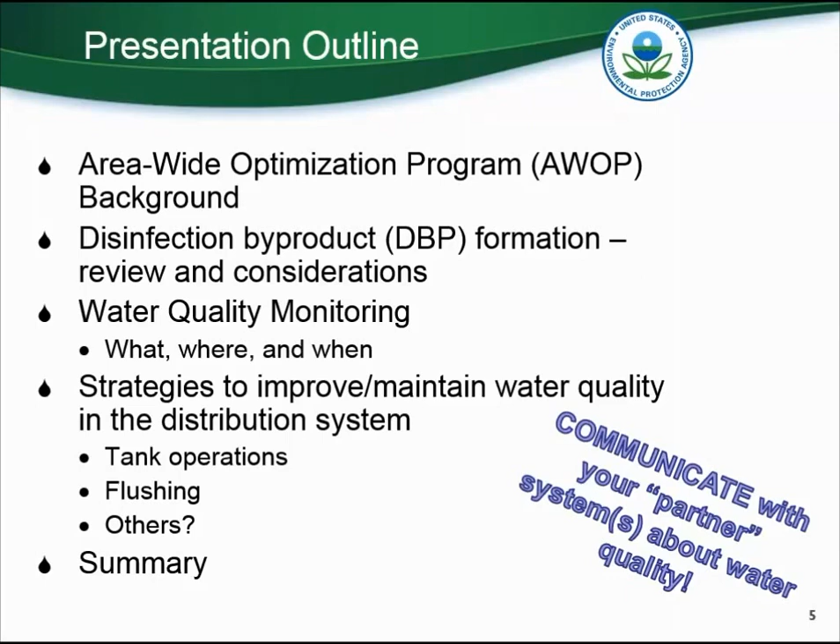The area-wide optimization program encourages drinking water quality beyond compliance levels, primarily through enhanced process monitoring and control using existing staff and facilities, so optimizing existing facilities. We also promote measuring performance relative to optimization goals, and we work hard to develop technical tools and implementation approaches which focus on improving or maintaining water quality, focusing on the multiple barrier approach.

In this case, we're really focused on the distribution system, keeping in mind that the residual in the distribution system is the last barrier to public health protection before consumers drink your water. The program began in 1989 with microbial or turbidity optimization at surface water treatment plants, and more recently has expanded to other areas, including control of disinfection byproducts through optimization of treatment and distribution system operations. That's what we're going to talk about primarily today.

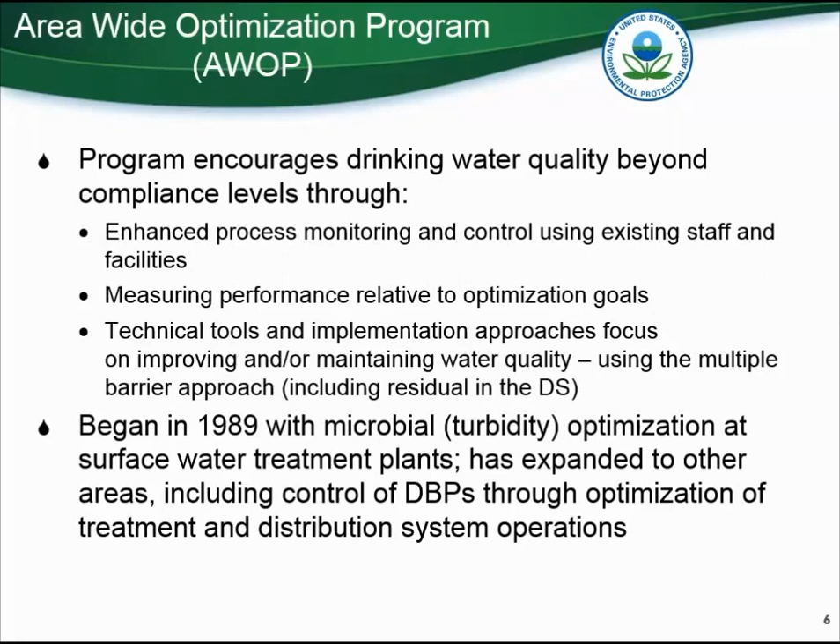AWOP establishes water quality and monitoring goals as well as operational guidelines that are generally more stringent than regulatory requirements. This is done to provide an increased level of public health protection to consumers, but also as a safety factor for compliance, for water system operators to keep in mind. We have established performance goals for disinfectant residuals and disinfection byproducts.

From the monitoring side, we also encourage paired residual monitoring, pH and temperature out in the system as well. We also have monitoring goals for frequency and locations throughout the system, which I'll talk about shortly, as well as operational guidelines for water storage tanks related to turnover time and mixing.

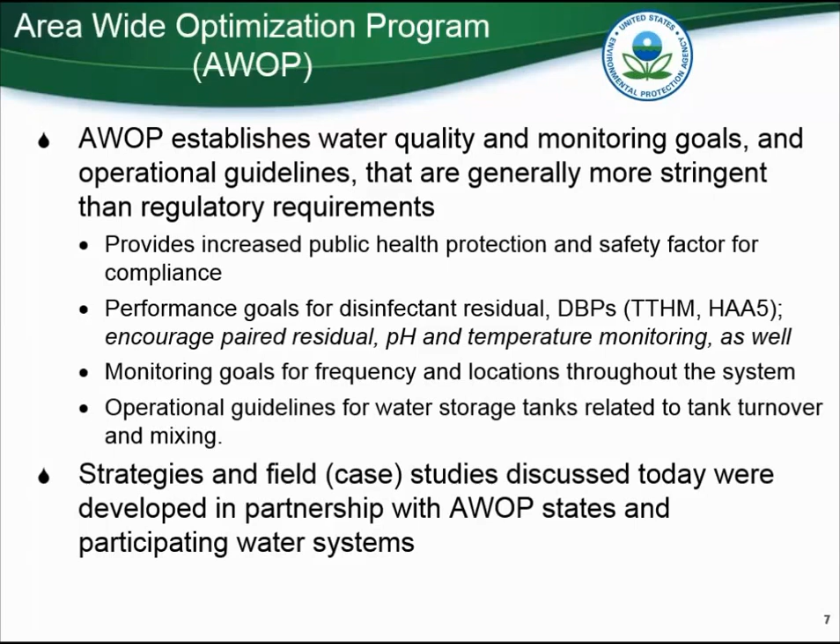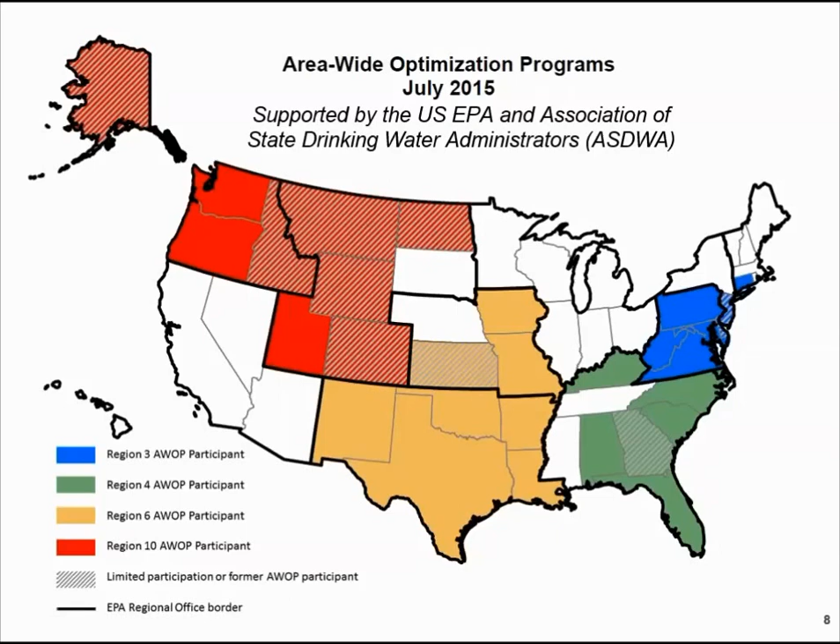All of the strategies and field case studies I'm going to talk about today were developed in partnership with the AWOP states and the participating water systems. Just really quickly, I want to show a map which delineates the extent of our national AWOP. Essentially, we have over 20 states participating, primarily from 4 EPA regions, and the program is supported by EPA and by ASDWA. I just wanted to show this to offer some context to you all out there. It's possible that you are in an AWOP state, and that might be a resource as you're dealing with some of these issues as well.

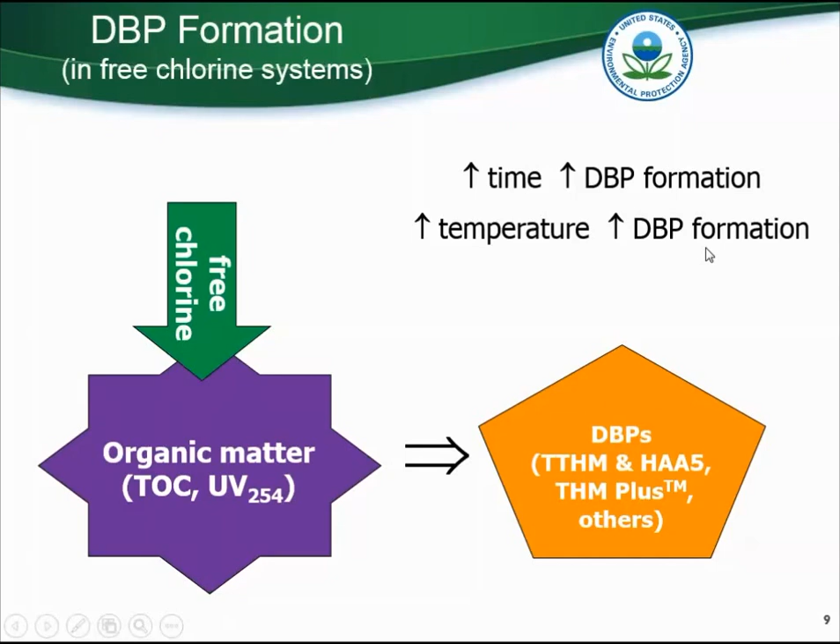Next I want to talk a little bit about DBP formation on a very high level. Essentially, what happens is free chlorine reacts with organic matter to form disinfection byproducts. Once these are formed, generally in the treatment plant, in a free chlorine system, over time, DBPs, especially THMs, will continue to form. And in warmer water, DBP formation is often much higher than we see in cooler water.

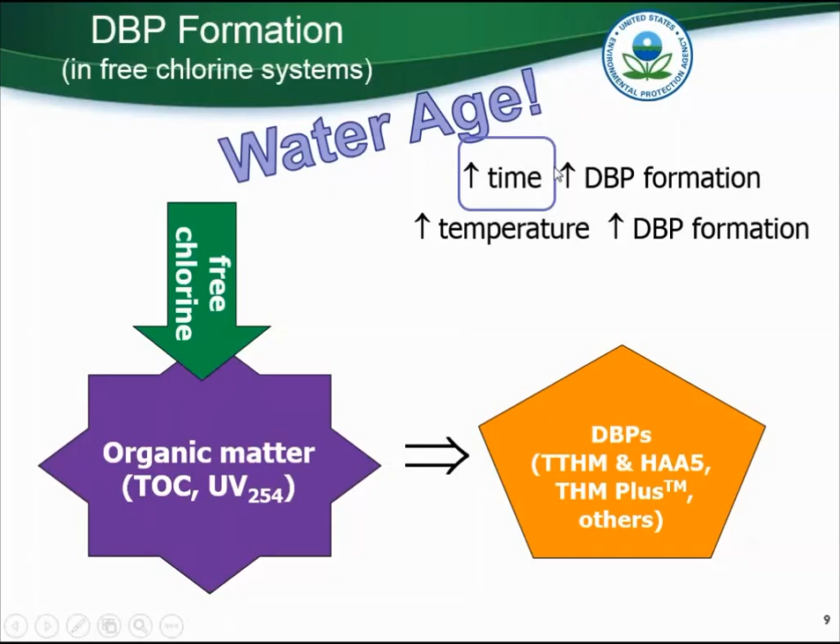I think the thing to really consider here is that the main parameter, of all the parameters that impact DBP formation, pretty much the only thing that a distribution system operator can control operationally out in the system is water age. And that's what we're going to focus on today.

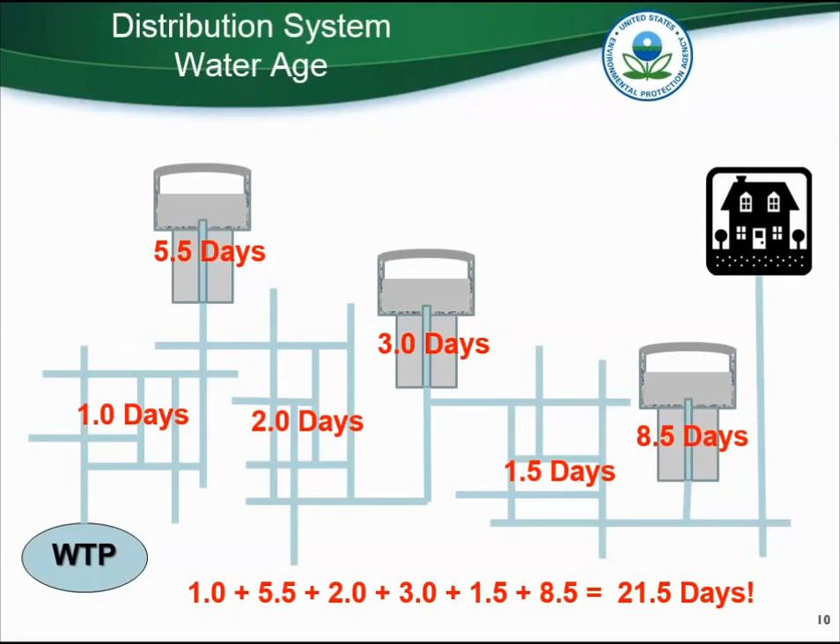We sometimes see water tanks that have several weeks of calculated turnover time from one tank alone. So I think one of the things we really want to emphasize is that you shouldn't underestimate the impact of water age on water quality.

Now I want to talk a little bit about monitoring, which means many things to different people. But really in the context of optimization, it means understanding what's going on in the system. So we use monitoring information or data to assess system performance relative to optimization goals or MCLs or whatever the objective is.

But what we found through our work in working with systems to control DBPs is that often quarterly DBPs at compliance locations are not sufficient for really understanding the extent of the problem and the impact of a solution that a system may be trying to implement. And we also know, on the flip side, that DBP samples are expensive, so increasing the frequency beyond quarterly, or at additional locations in the system, can get really costly for a system very quickly.

So we really promote using surrogate parameters for monitoring. And those include chlorine residual, pH, and temperature, all of which can be measured by an operator. That water quality data or information is generally available immediately, as opposed to sometimes it can take a few weeks for THM results, for example, to come back from a certified lab.

So with having that data immediately, an operator can make decisions about what's going on in the system and whether or not there's an impact that's happening. So we really encourage through optimization to try to measure chlorine residual, pH, and temperature when collecting DBPs.

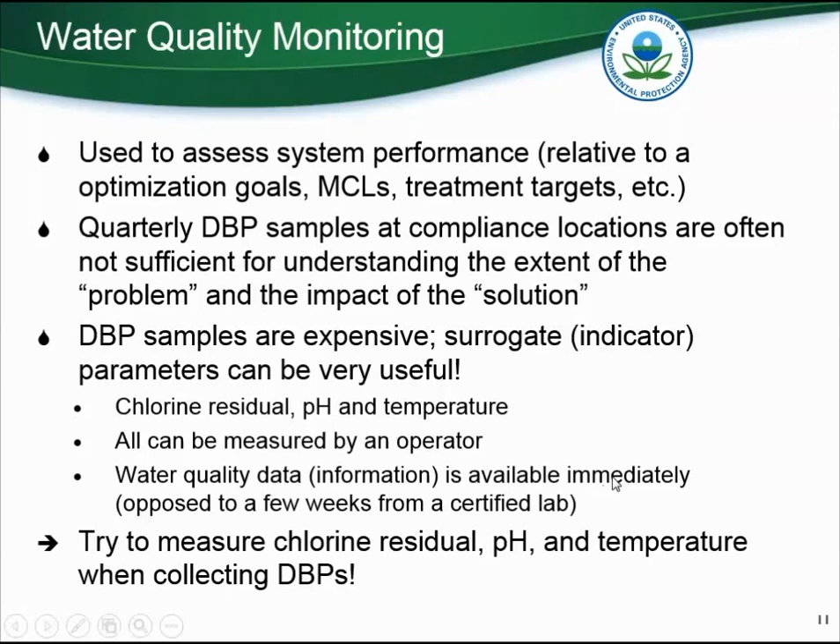We also promote through optimization more frequent monitoring than what some of the regulations may require, just to get a better understanding of the system. So we encourage monthly monitoring, and sometimes even more frequently during critical times, say hot weather.

And we encourage monitoring at regular compliance locations, whether it's DBP location, TCR, whatever the location might be, to enhance the historical data and provide some additional baseline data.

But we also encourage water systems to monitor at their entry point and at consecutive system master meters. Whether you're a parent system monitoring the water leaving the plant to the systems you're selling to, or you're a consecutive system purchasing water, it's good to understand what's entering the system. And it's really important that those results are communicated among the systems, so you can have an understanding of what might be happening in terms of water quality.

We also promote monitoring from storage tanks while they're draining and other critical sites in the system. But all of this monitoring and data collection is only valuable if something is actually done with the data. I'm going to show a couple examples of that next.

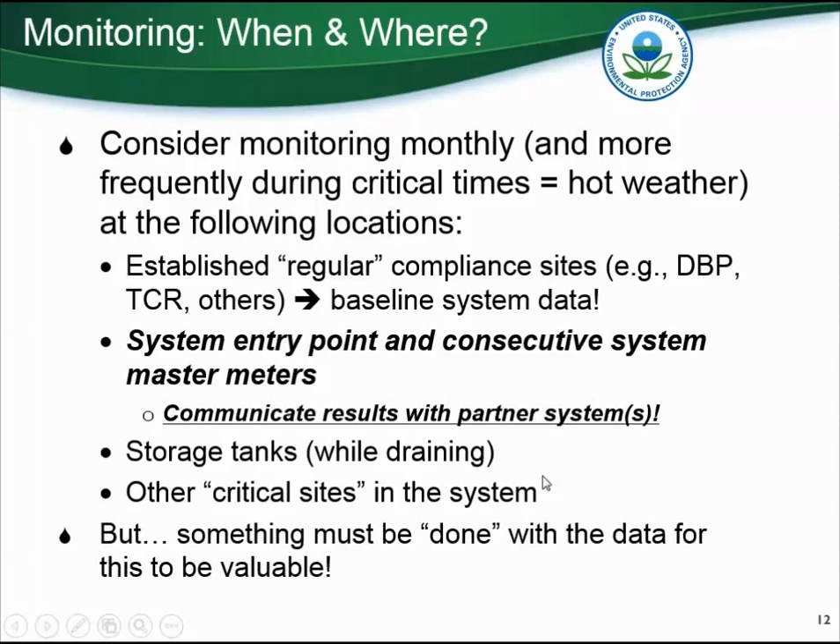So this is one example of how collecting surrogate parameters, in this case free chlorine, can be helpful in assessing DBP formation. In this particular system, about 25 samples were collected, starting at the water plant effluent and working out to multiple locations in the distribution system. Then the data were plotted with free chlorine on the x-axis and THM concentration on the y-axis.

That allows the relationship between these two parameters to be better understood. And although this is kind of rough and it's going to change seasonally and is very system specific, it can provide some valuable information about potential THM formation.

So, for example, in this particular system, when their residual is less than about 0.4 milligrams per liter, it might be concerning to them because historically their THMs have been around 80 or greater, and that residual level might be a trigger to go out and take a closer look at things.

And for most of the free chlorine systems we've worked with, we've seen that lower chlorine residual is typically an indicator of higher THM concentrations, and chlorine residual is, for that reason, a very good surrogate for DBP formation.

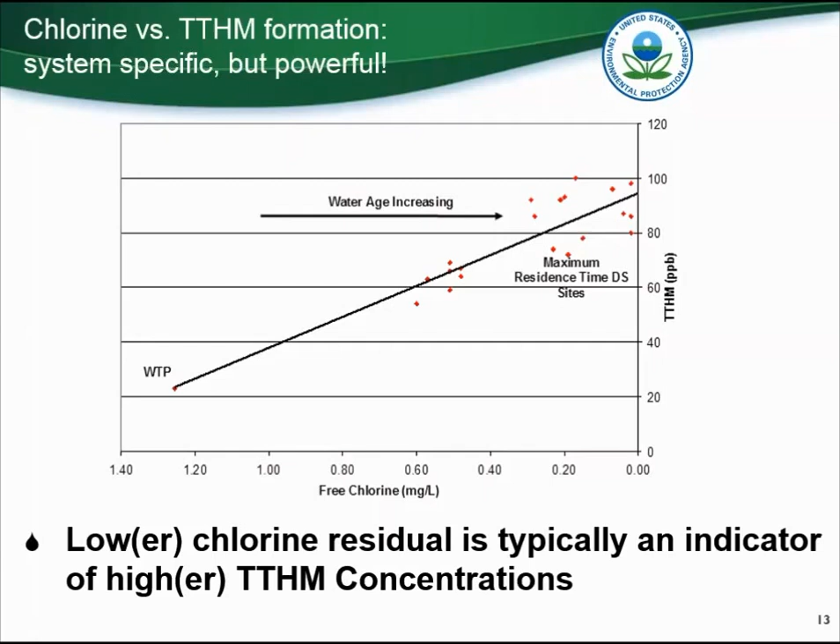We've also seen, though I don't have time to show it today, that sometimes elevated pH is an indicator of high THMs, and naturally water temperature is as well, so in the summer versus the winter in terms of THM formation. So if these parameters are measured in tandem with the DBPs, you can start to develop that relationship and use those surrogates.

Another helpful tool for systems is to assess areas of the system with potentially high water age, and develop a water quality map.

So in this particular study, we sampled throughout the system, starting at the water plant to get some baseline water quality data, and then throughout the system. This legend is just indicating the chlorine concentrations we measured throughout the system, over 1 down to as low as 0 milligrams per liter.

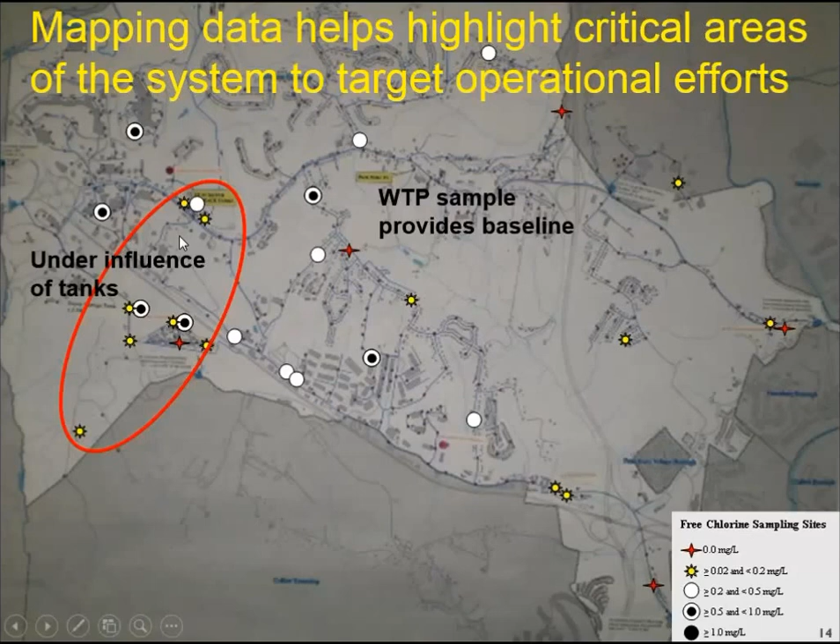Once the data is plotted on the map, systems can look more closely to identify what might be happening in these areas. For example, this area is most likely influenced by these water storage tanks, and that could be the reason for the poor water quality in this part of the system.

Other areas of the system might simply have high water age because they're at the end of the service line or at some other isolated dead end. But once you have an understanding of what's happening spatially throughout your system, you can target areas with low residuals for operational improvements, because most likely these areas with low chlorine residual have high THM concentrations.

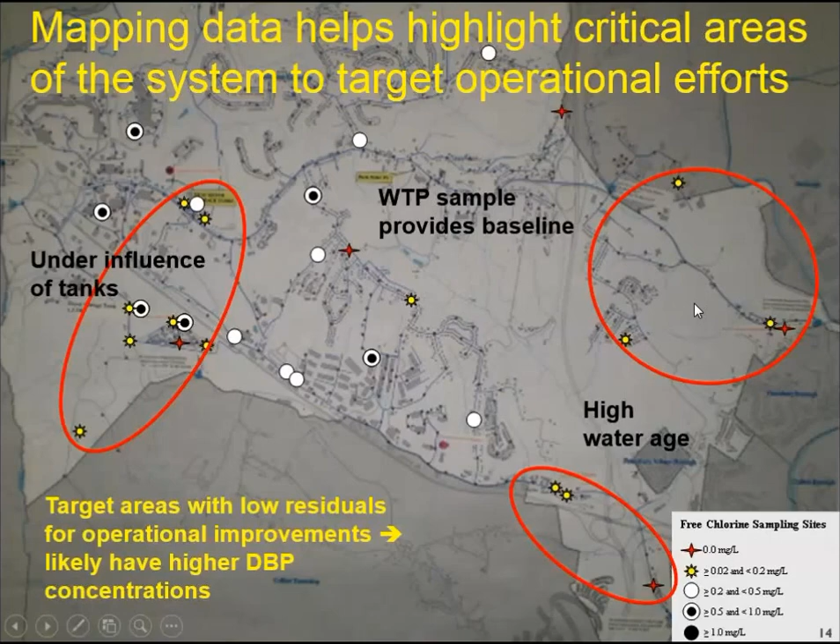Now I'd like to talk a little bit about strategies that can be used to improve or maintain water quality in the distribution system, starting with water storage tanks.

If you recall a couple slides ago, we talked about how storage tanks can add significant water age in the distribution system. Sometimes that's due to tank design, because after all, they're designed for water quantity, system pressure, and fire protection, not necessarily for water quality. Also, sometimes systems aren't aware of how operational changes can impact water quality, but other times it's a hydraulic limitation that might restrict a system's ability to change tank operations.

But in general, the first thing we generally do is try to encourage systems, or work with systems, to take a close look at storage tank operations and whether they are optimized for water quality.

So there are two parameters we think about in terms of water quality in storage tanks. The first is tank turnover time, or water age in the tank. Basically, that's the average time that water is in a tank, and it's a function of how much volume is in the tank and how quickly the water flows in or out.

The second parameter is tank mixing. That simply describes whether the water is mixed, or homogeneous, versus whether the water in the tank is unmixed or stratified. It's a function of water velocity coming into the tank and the duration of the fill cycle.

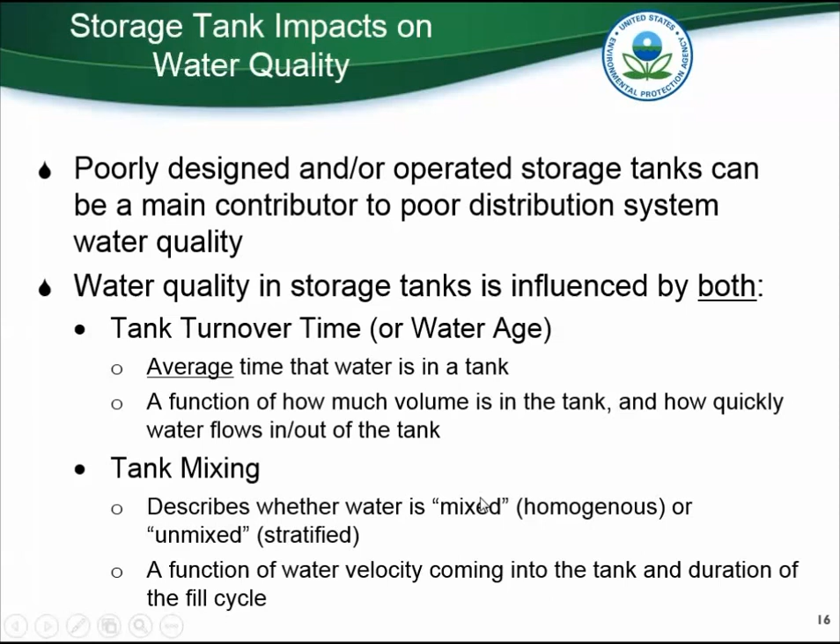Through our optimization program, we've established some operational guidelines for storage tanks. The first one, related to storage time, is to maintain a low turnover time, less than 5 days, at all times, or establish and maintain a tank-specific water turnover rate.

That's an important point, because for some water systems they can get away with a little higher water age in a storage tank, since they have a relatively small distribution system and maybe only one or two tanks. But for other water systems, where they have multiple tanks that water flows through before reaching a consumer, 5 days may be too much. That's why we've set this up as an operational guideline rather than a firmer goal.

The other parameter we look at is maintaining good mixing at all times in each tank. We assess mixing using this performance ratio parameter, and our goal is to have the performance ratio be greater than 1. That's simply an indicator of actual mixing divided by the desired mixing in the tank.

Both parameters can be roughly assessed using a spreadsheet tool, but really, at the end of the day, it's water quality monitoring, either at, around, or in the tank, that should really be done to confirm whether the tank is contributing to poor water quality, before any significant changes would be made to a tank.

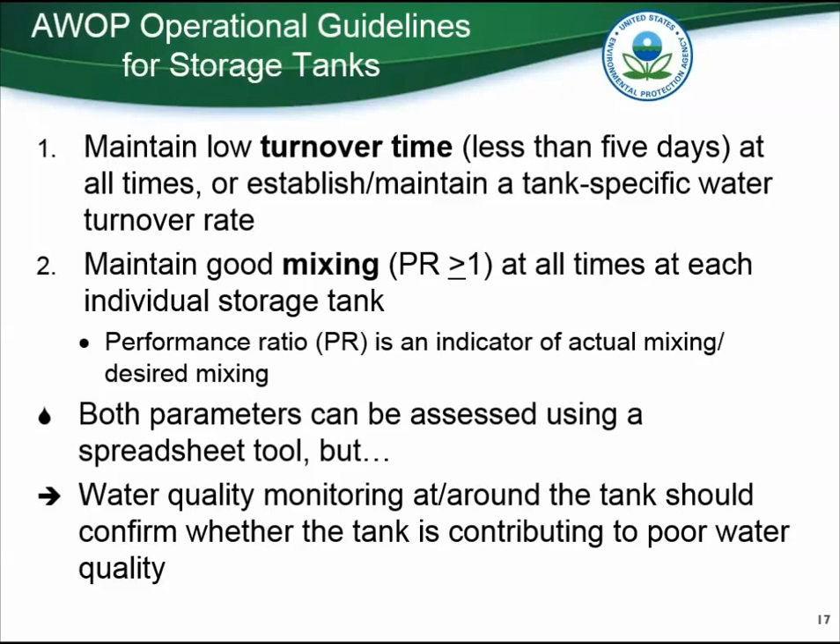So the next couple slides, I want to show some examples of the impacts of tanks on water quality. In this first slide, the data was generated in partnership with the state of Pennsylvania. Essentially, they used a string of temperature data loggers in this tank at a range of water levels over a couple-week period.

Temperature was measured at the top of the tank, then a couple feet down, all the way to roughly the bottom of the tank. As you can see here, the data loggers indicated that the tank was thermally stratified, and by definition, greater than a 2 degree Fahrenheit difference is significant. Here, the temperatures ranged on average from the low 60s up to almost 80 degrees Fahrenheit, which suggests the tank was not well mixed.

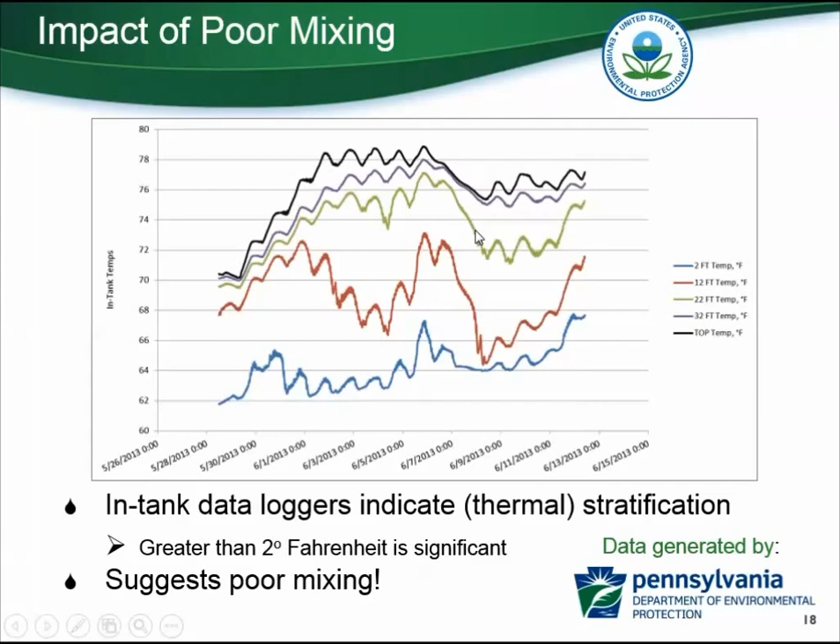The second example is also from the state of Pennsylvania and demonstrates the impact of having both high turnover time and poor mixing on water quality. In this case, there were two identical tanks side by side, both 260,000 gallon ground level tanks.

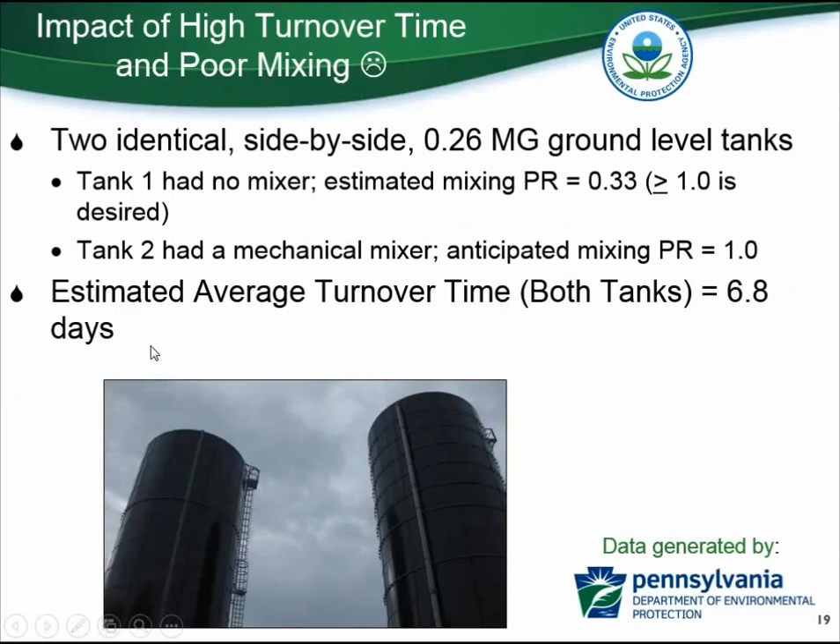Tank 1 did not have a mixer, so we estimated the mixing performance ratio to be about 0.33, and again, 1 is desired. Tank 2 had a mechanical mixer, so we anticipated that the mixing performance ratio, assuming the mixer is working properly, is 1. We also estimated the average turnover time in each tank was 7 days.

This slide shows grab sample data from both of those tanks, from the bottom of the tank to the top of the tank, showing chlorine residual. Tank 1, shown in red, which is the unmixed tank, is pretty stratified. The water quality coming into the tank was almost 1 milligram per liter residual, but as we moved up in height to the top of the tank, we were almost down to 0 milligrams per liter chlorine residual.

On the flip side, the blue tank, tank 2, was well mixed, but recall that the turnover time in that tank was about 7 days. So while the residual was consistent, it was only around 0.2 milligram per liter total chlorine concentration. So the mixed tank had uniform water quality, but the high water age resulted in a low residual.

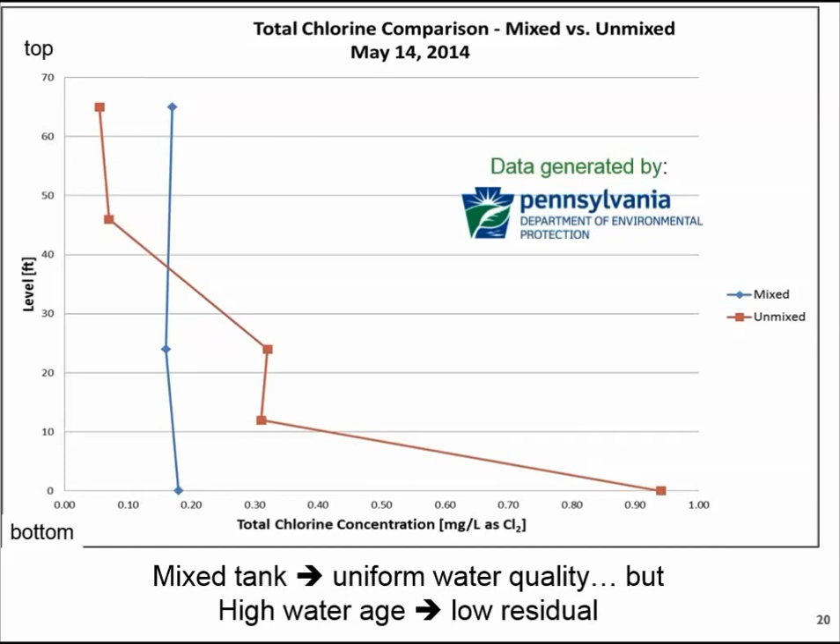One of the take-home messages to emphasize here is that simply installing a mixer in a tank is not going to improve water quality. You have to have sufficient demand on that tank to have a water quality benefit from a mixer. It's just something to be mindful of, and not insurmountable - we'll talk about that in just a minute.

The last example I wanted to show quickly is a good example of low turnover time and good mixing in the tank. This was done in partnership with the Kentucky AWOP team, and we evaluated a 500,000 gallon elevated tank that had a mechanical mixer. The average turnover time in this tank was 1.4 days - low turnover time, well mixed, and the water quality data supports that.

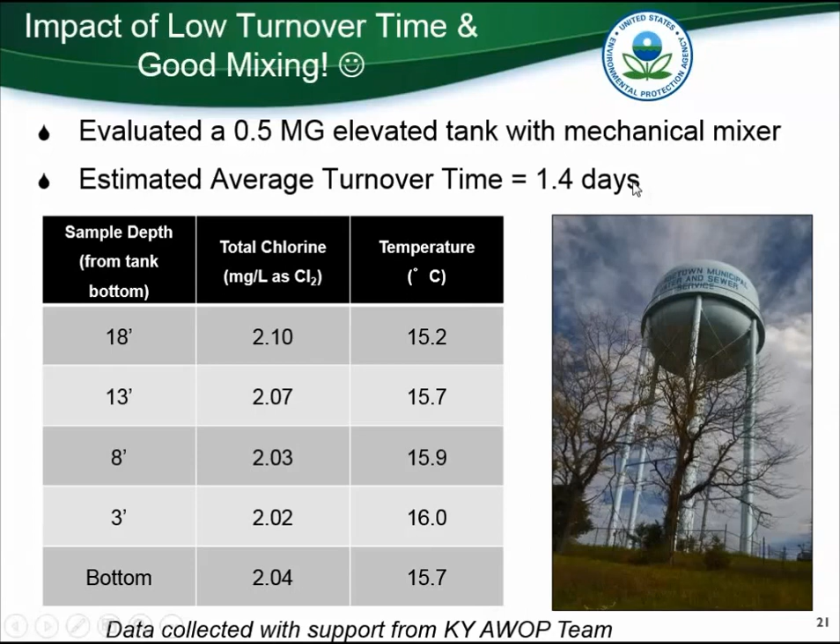We sampled from the bottom of the tank up to the top of the water column, and the residual was consistent, just over 2 milligrams per liter, and the temperature was consistent as well. So it is possible to have good water quality from tanks if they're well mixed and the turnover time is relatively low.

So if you're in a situation where you don't have low turnover time or a well-mixed tank, there are some things that can be done to address that and improve water quality. Operationally, water systems can work to reduce the tank volume - essentially the tank would need to operate at a lower top level or lower bottom level, or both, to generally reduce the overall volume of water in the tank. However, a lot of systems run into pressure constraints or storage requirements that might limit their ability to do this.

Another way you can reduce the turnover time in the tank is to increase the fill and draw frequency. Essentially you're exchanging the same volume of water more frequently, but to do this you need to increase the demand on the tank. That often involves rerouting water or somehow adding a source of demand on the tank just to get it to exchange more frequently.

There are design changes that can also be applied in the distribution system. Some systems have actually removed tanks from service if they have more storage than they need, or considered reducing line size. That may not necessarily be something you go out and do right now, rip up the line and put in a smaller diameter line, but in planning you could keep in mind maybe putting in a smaller line size as you're balancing water demand with water quality.

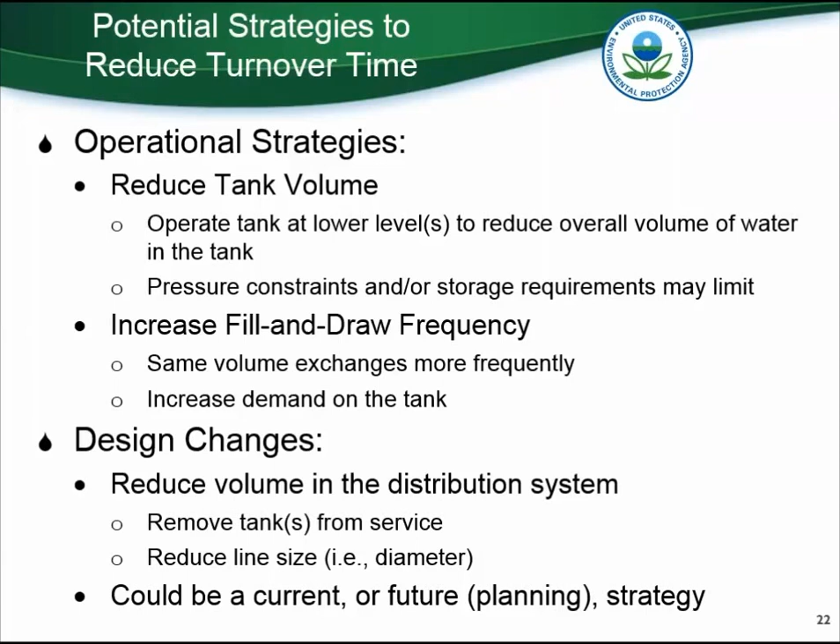On the mixing side of things, there are a couple operational strategies as well, mainly related to increasing the operating span, which will essentially increase the fill time or the time that the tank would mix during filling. You can also change the fill rate or duration - essentially adding the same volume but changing the mixing intensity. A faster rate over a shorter time or a slower rate over a longer time will both have a positive impact on mixing.

However, there are some operational considerations when you think about these strategies - not just balancing them, but also if the tank is thermally stratified, as we saw from that one tank a couple slides ago, that can prevent good mixing. Also, the simple placement of the inlet and outlet location can make operational mixing impossible to achieve. So that's something to keep in mind as well.

And there are design changes that can be done. Obviously, an engineered mixing system can be an option for some systems, or changing the inlet diameter to increase the inlet velocity can also be effective as well.

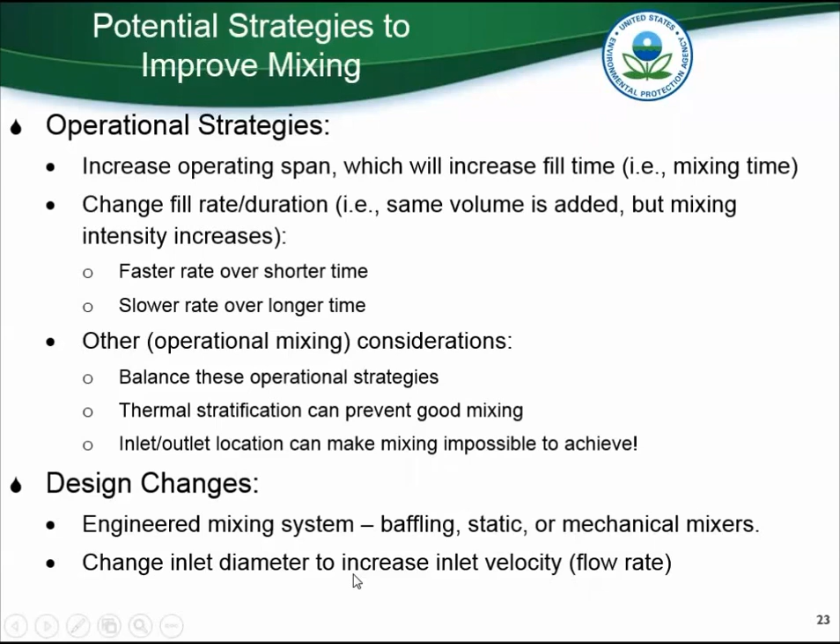Okay, next I want to talk a little bit about flushing and the impact that can have on water quality. I'm going to focus today on automatic flushing and the benefits of an automatic flushing program. Essentially, it's a proactive approach, the way we apply it through optimization, to maintaining water quality.

It has a relatively low flow rate and a relatively low initial capital investment to implement. You typically see an immediate water quality improvement due to reduced water age. We joke that we're actually creating artificial demand in the system by flushing and running these automatic flushers, but essentially that's what you're doing—creating a demand source, someplace for the water to go to keep it fresh.

This increases the disinfectant residual, reduces disinfection byproducts, and since it's done at a relatively low flow rate, it doesn't cause discoloration and tends to reduce customer complaints associated with taste, odor, and color. Of course, the flip side is you could have a customer complaint associated with dumping water on the ground, and you have to be mindful of that as well.

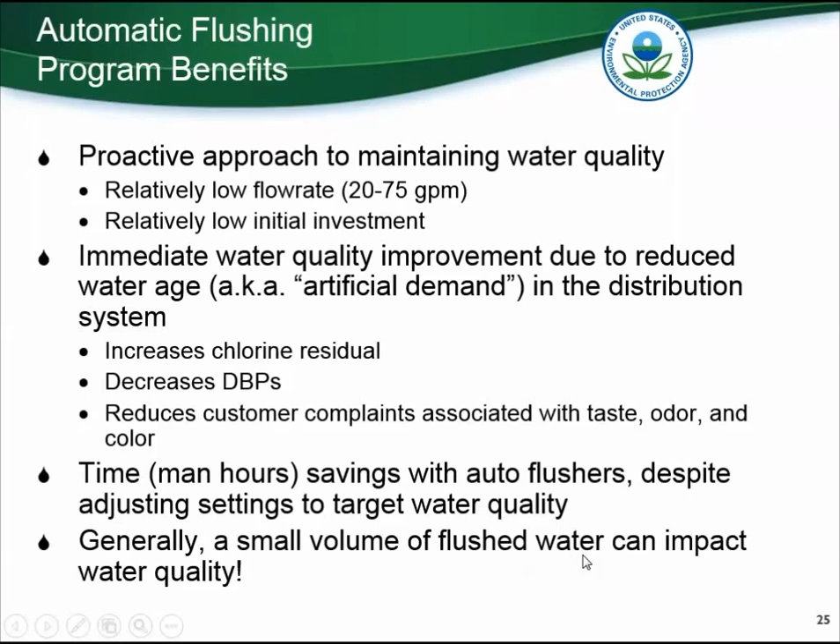Several systems we've worked with have reported time savings or man-hour savings with auto flushers, whereas before they used to just go out and flush when they had a water quality complaint. They installed auto flushers, and that saved man-hours, despite the fact that adjusting settings to target water quality does take some time—we'll talk about that a bit more in a minute. Generally, in the systems that have quantified this, we've seen that a relatively small volume of water flushed can really impact water quality, and I'm going to show some examples of that next.

This particular system is a relatively large rural water system in northern Alabama. They are a purchase system, a consecutive system, so every drop of water they don't sell is lost revenue for them. Over the past several years, they've installed 14 automatic flushers, which run year-round—they're in northern Alabama, so it doesn't get too terribly cold. They run the flushers for variable lengths of time depending on the water quality in that area of the system. Each flusher cost about a couple hundred dollars to install.

The flushing settings—duration and frequency—are adjusted based on water quality at the flusher location, which they check monthly. They have a water quality goal at each location, and if the residual measured there is higher than the goal, the operator will decrease the flushing volume; if it's too low, they'll increase the flushing volume. That's the process they go through to optimize, and they write everything down and meter all the water they flush, so they really have a handle on things.

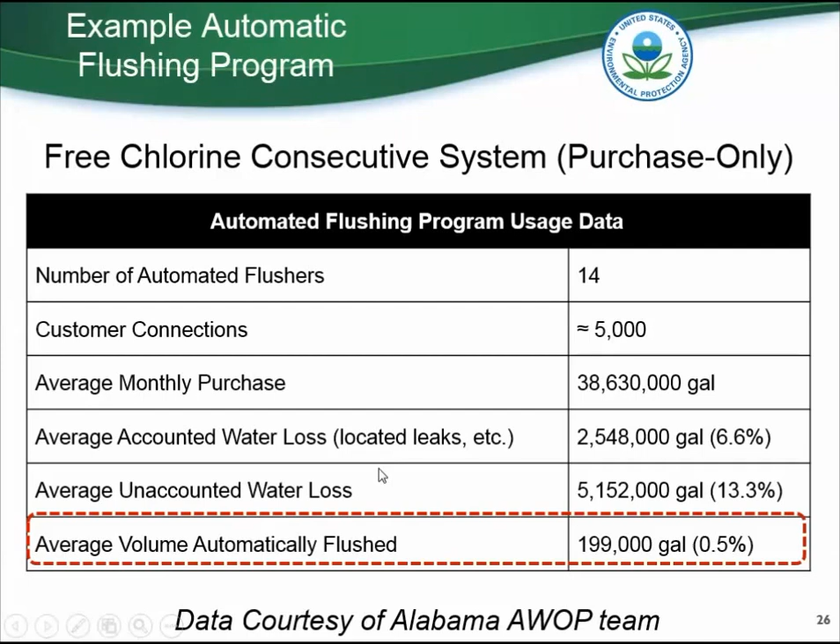I put some information about the system in this table, and the take-home here is that the amount of water this system is required to flush to maintain good water quality, 0.5%, is significantly less than either of their water loss rates, and really, to them, considered the cost of doing business.

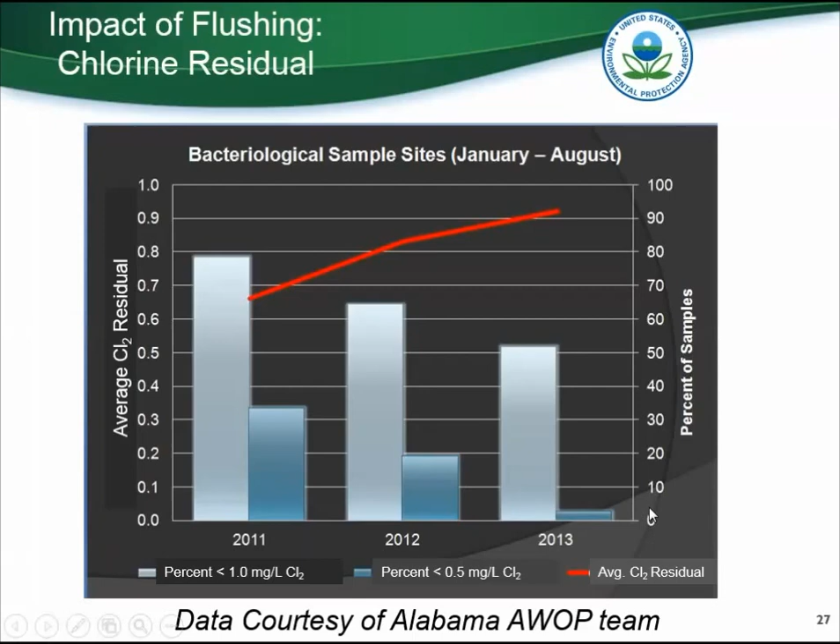The other thing that might be of interest is the percent of samples that are less than 0.5 milligrams per liter, and those dropped off significantly as they implemented their flushing program.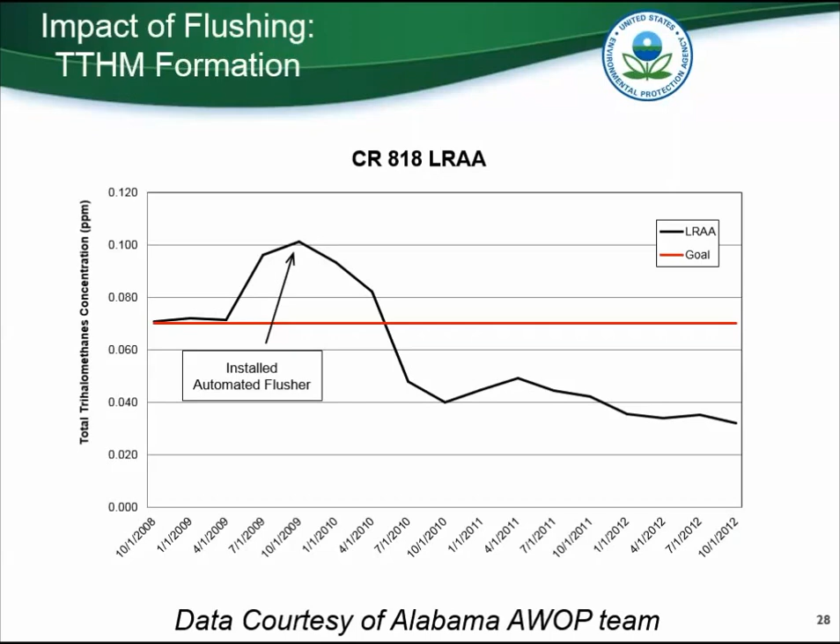So when implementing this kind of program, the systems we work with always meter the water they flush. The settings for the automatic flushers are determined based on water quality and adjusted on some frequency, usually monthly. Although little water is flushed, when they quantify it, they think of it as the cost of doing business—typically it's just a few percent of their distributed volume.

So the last strategy I want to quickly talk about is rerouting water. That's a really system-specific strategy, but it can be effective.

Basically, systems that have had success with this are just changing how water moves through the system through a combination of valving and rerouting and pushing water through differently. One example: a system was able to route through an area of low demand to end up at a high demand customer, in this case a dog food factory. I love that example because I remember it - I can see how that's happening.

Another example is a system that had installed parallel lines for fire protection - larger lines with hydrants in parallel to smaller lines. They were able to valve off and route the water through the larger line instead of the original smaller lines, which were tapped in for residential demand, to keep water moving. There are some constraints with this, and it might present hydraulic challenges, so it's not something to be pursued lightly. But it has worked for some systems, and that's important to emphasize as we share information about ways to improve water quality. Often this needs to be done in combination with other strategies, like managing tanks or automatic flushing.

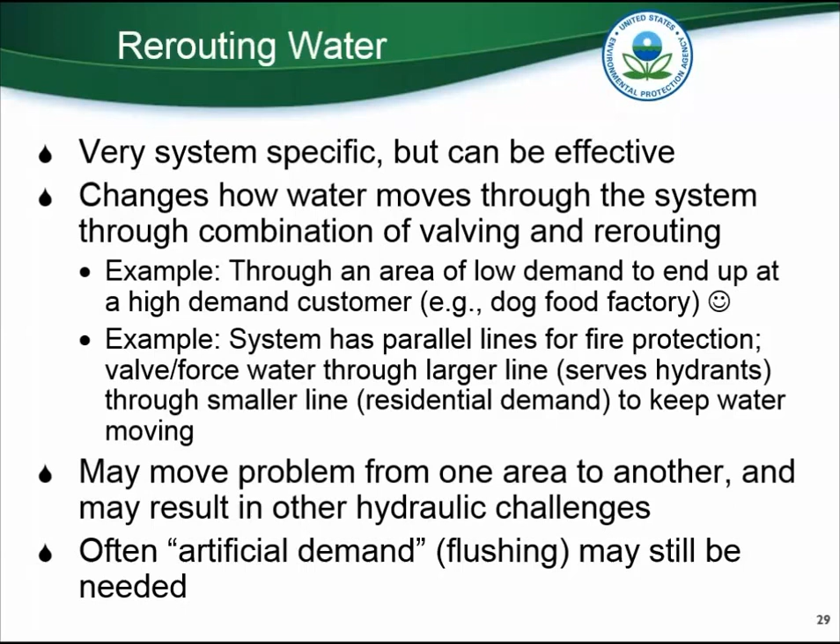So in summary, through our optimization program, in working to control DBPs, we really promote monitoring to assess what's happening in the system using surrogates, because quarterly DBP data sometimes isn't sufficient, and understanding water quality entering the water system. That's really important - knowing how to focus efforts, knowing what kind of water is coming into your system and what's happening out in your system, and then doing something with the data to make it meaningful.

Typically with operational strategies, they focus on reducing water age - that's really what it boils down to - either by modifying tank operations, creating artificial demand, or moving water around to impact water quality. These approaches may not completely solve the problem for all systems, but they're definitely lower cost approaches that operators can implement, and a great starting point if you're struggling to control DBPs in your distribution system, especially THMs.

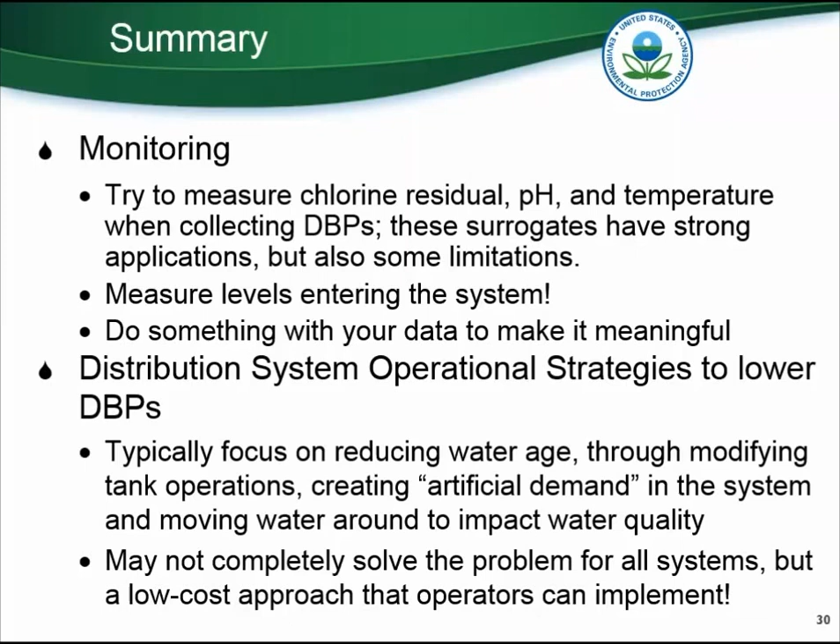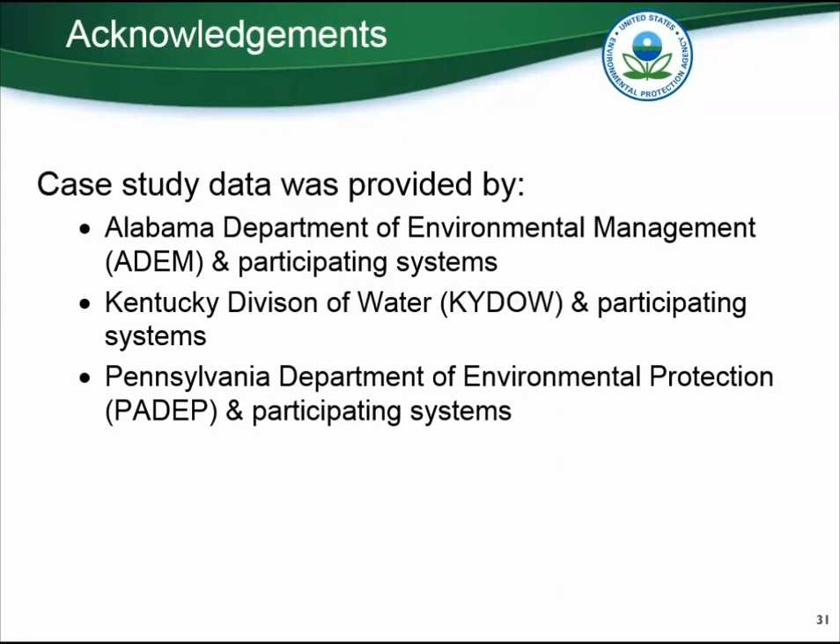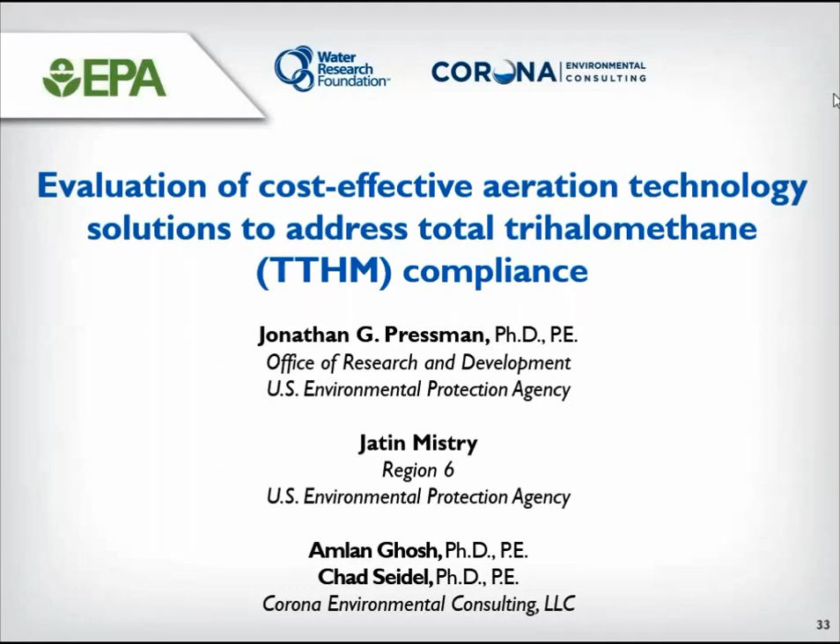This was a large project funded through the U.S. EPA Water Environment Research Foundation Cooperative Agreement on Innovation and Research for Water Infrastructure for the 21st Century, which also involved the Water Research Foundation. It was a project team consisting of several consulting firms - Corona Environmental Consulting, American Water, Jacobs Engineering Group - and the Otoe-Missouria Tribe, with collaborators from EPA, the Water Research Foundation, and Oklahoma DEQ. Let's start with a little background.

The Stage 2 disinfection byproducts rule has only recently become a requirement for small systems. This rule changes the calculation for compliance to a locational running annual average, as opposed to the system-wide average that was previously used. This can be a more challenging constraint for many systems.

Several years ago, my colleague in Region 6, Jatin Mistry, came to me with concerns about the Stage 2 DBP rule and small system compliance, particularly those with less than 10,000 customers, non-transient non-community systems, and small consecutive systems. DBP data from Region 6 showed significant THM formation in many small rural systems' treated waters, even before leaving the Clearwell. There were also many situations of small rural consecutive systems purchasing water from other small rural systems, where the consecutive systems have no treatment or means of lowering DBPs.

Many of these rural systems are challenged to optimize treatment for DBPs because of limitations with water treatment plant equipment, and the technical abilities and time of the limited operations staff. They need cost-effective treatment technologies with extremely low operator intervention.

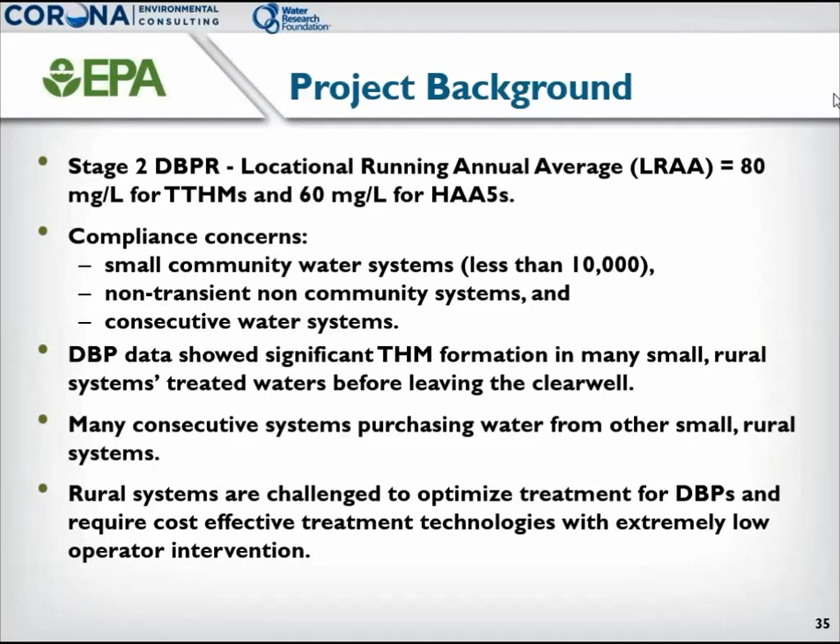One such treatment, taking into account the volatile nature of THMs, is aeration. Aeration is a gas-liquid transfer process where the equilibrium condition, which is often represented by the Henry's law constant, and the hydrodynamic conditions, which include things like mixing and interfacial area, are exploited to transfer THMs from water to air.

Aeration has been successfully used in distribution system tanks, but only rarely evaluated at the water treatment plant, because THMs form over time and generally become more of a problem in the far reaches of the distribution system. HAAs are not volatile, therefore not amenable to aeration treatment.

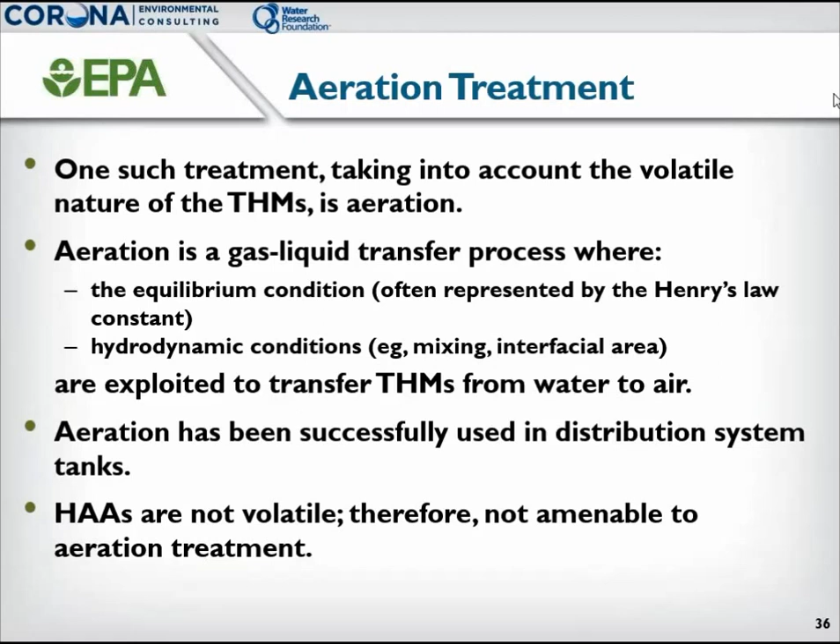However, in discussions with Region 6, we found there were many utilities that had low HAAs and whose primary issues were THMs, therefore making aeration an appealing technology to assess.

Therefore, the objectives of the project were to perform a comprehensive evaluation of formation and removal of THMs in a water treatment plant's clearwell using aeration technologies. Conducting the project at the water treatment plant clearwell was an important aspect of the project, because the Region 6 data showed high concentrations of THMs before the water even left the treatment plant.

And then, to evaluate the feasibility of aeration technologies for helping small systems achieve Stage 2 DBP compliance, because it would be much easier for small system operators to maintain this simple technology at the water treatment plant, and because it would potentially solve the THM problem for multiple downstream small consecutive systems.

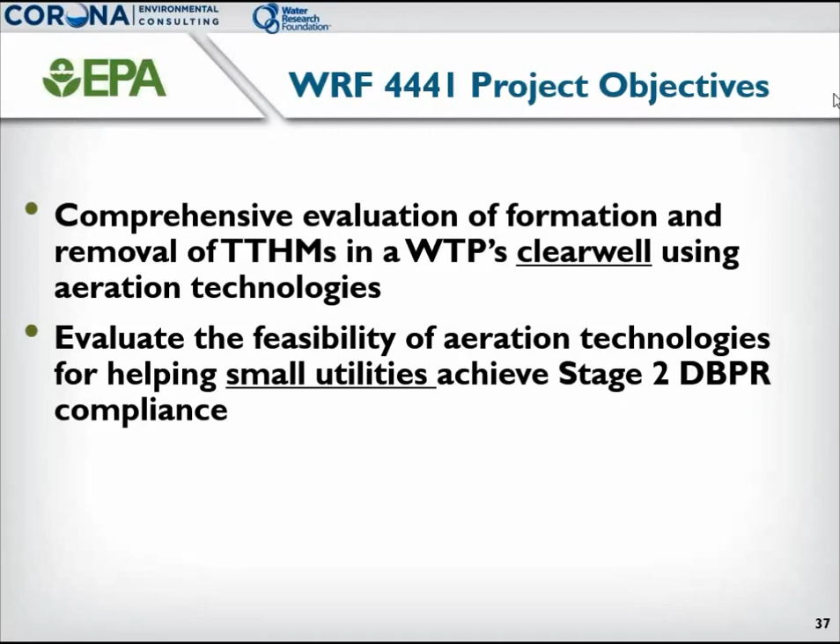Aeration has been demonstrated to have relatively low capital and operations costs compared with other THM compliance approaches, and can achieve high levels of THM reduction.

In spray aeration, THM-laden water is pumped through engineered spray nozzles above the water surface in a tank. As the fine water droplets fall through the air above the water surface, the volatile THMs are transferred to the air.

In surface aeration, small droplets of water are created by a floating surface aerator that is pushing water from a few feet under the water surface up into the air and across the surface to transfer the THMs to the air. With these technologies, tank mixing and ventilation is often incorporated and will be investigated as well.

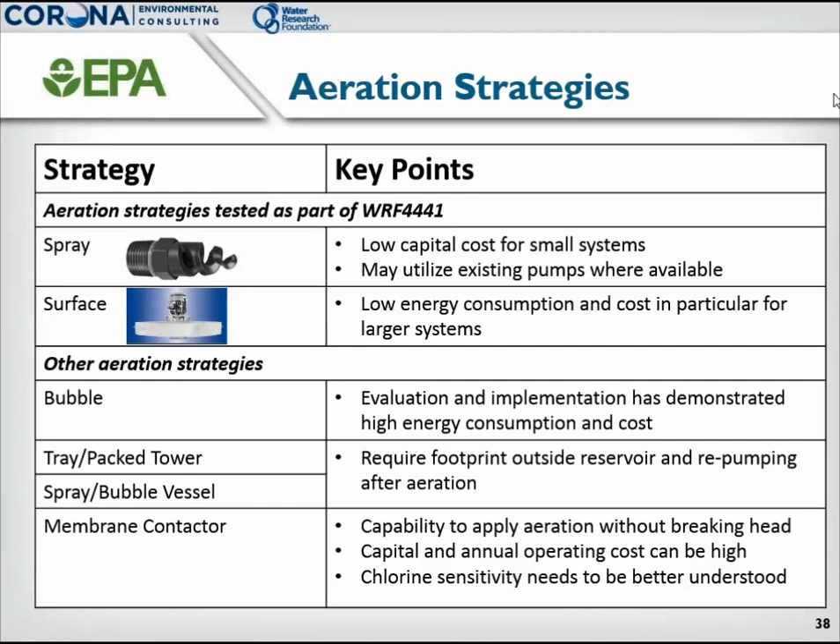Other technologies that can be evaluated, but were not field tested in this project, include bubble aeration, packed tower and tray-type aeration systems, and membrane contactors.

The first task in the project was the utility and site selection, evaluation, design, and permitting. Utility selection was critical to the success of this project. At the outset of the project, it was determined that the full-scale testing would be conducted in a reservoir located at a small, rural, or tribal utility with known THM exceedances, but no HAA exceedances.

The utility needs to be located in EPA Region 6, specifically in Oklahoma. The first requirement was a utility that would be a willing participant in the project. Utility staff must have availability and be willing to provide support during the project.

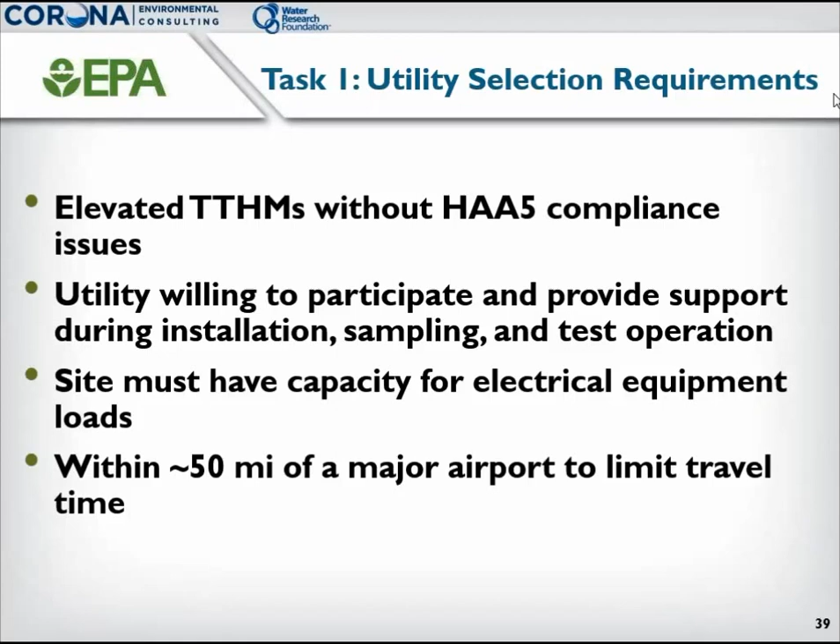The Clearwell site needed to have the capacity for electrical loads required by the aeration equipment, because installation of additional power service would not be feasible in the project budget. And it was desirable to have the utility located within about 50 miles of a major airport to limit travel time for the project team.

Furthermore, there were necessary Clearwell requirements as well. These included that the selected Clearwell needed to have excess CT to allow for the addition of mixing without compromising the disinfection process and compliance.

The storage volume needed to be less than about 3 million gallons, which would be most appropriate and ideal for this project considering the sizing and cost of the temporarily installed equipment.

The ideal reservoir would have at least 2 sizable hatches to accommodate installation of mixing and aeration equipment, be operated at a near constant water level with at least 3 to 4 feet of headroom to incorporate aeration technologies, and be at ground level for easy access without a crane.

Existing penetrations into the tank would be available for spray aeration and ventilation, and the reservoir would be physically capable of supporting the equipment.

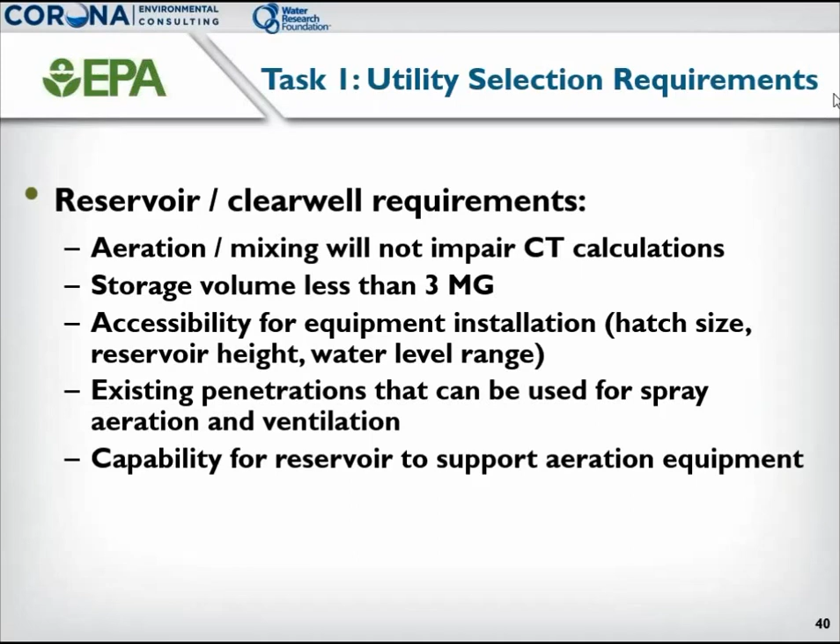More than 60 utilities were evaluated during the utility selection process, resulting in the selection of the Otoe-Missouria Tribe Water Treatment Plant in Red Rock, Oklahoma. The water treatment plant serves a population of approximately 250 and is supplied by raw water via a pipeline from Kaw Lake in Stillwater, Oklahoma.

The water treatment plant process consists of twin microfloc trimite 50 units, which are adsorption clarifiers followed by mixed media filters with a coagulant polymer blend and sodium hypochlorite disinfection. The daily water treatment plant capacity is 115,000 gallons per day.

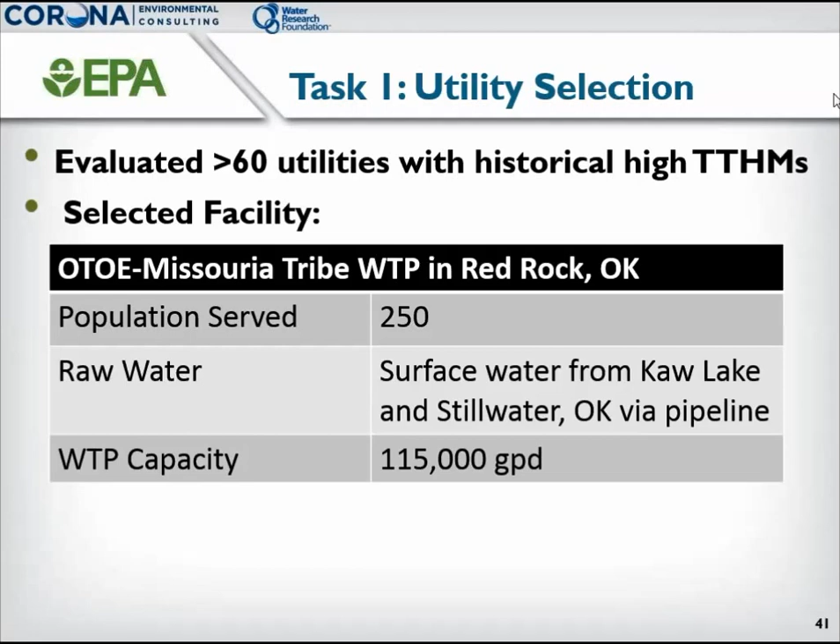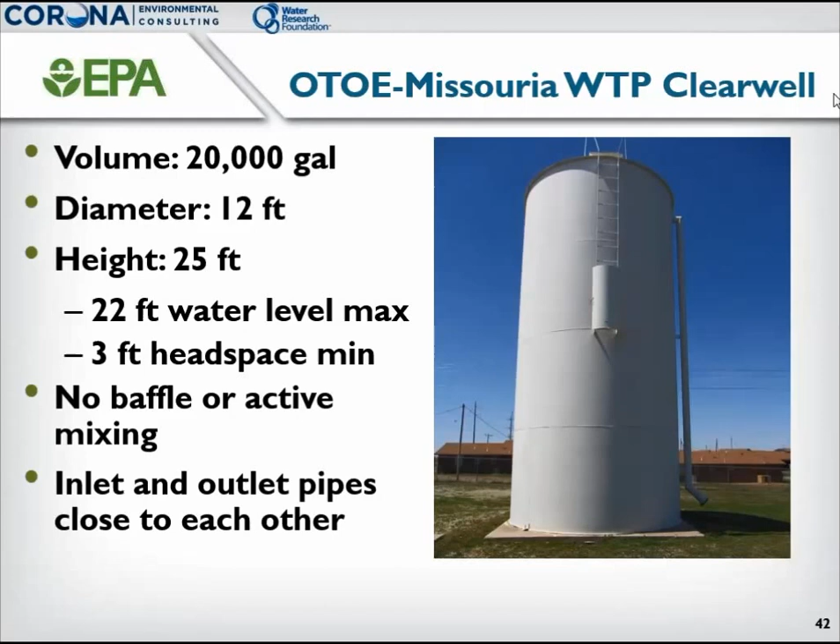From the water treatment plant, water is pumped into the clear well, which is a 20,000 gallon steel welded tank, 12 feet in diameter and 25 feet high. While not the ideal incarnation of the proposed requirements, the attributes were sufficient for installing both the spray and surface aeration equipment, and in a size and cost range within the project budget.

This project was the first THM aeration installation to be permitted in Oklahoma, and the project team coordinated closely with staff at ODEQ. The utility selection process occurred in the winter and spring of 2014, followed by the initial design report submission in June of 2014.

It took several months to get through the permitting process such that everyone was comfortable with the technology being tested. One requirement that resulted from the process was the need to move the chlorine dosing earlier in the process to provide additional CT to ensure Giardia compliance.

It's important to note that while using aeration for THM reduction, you also need to be mindful of overall water quality objectives. As such, if aeration is implemented at a water treatment plant clear well, where CT achievement is critical, it needs to be ensured that the mixing due to aeration does not interfere with the CT objectives. In this case, additional CT was needed.

The second project task was the installation of equipment and actual demonstration testing, which occurred between November 2014 and January 2015. The original project plan called for the demonstration testing to occur in the summer.

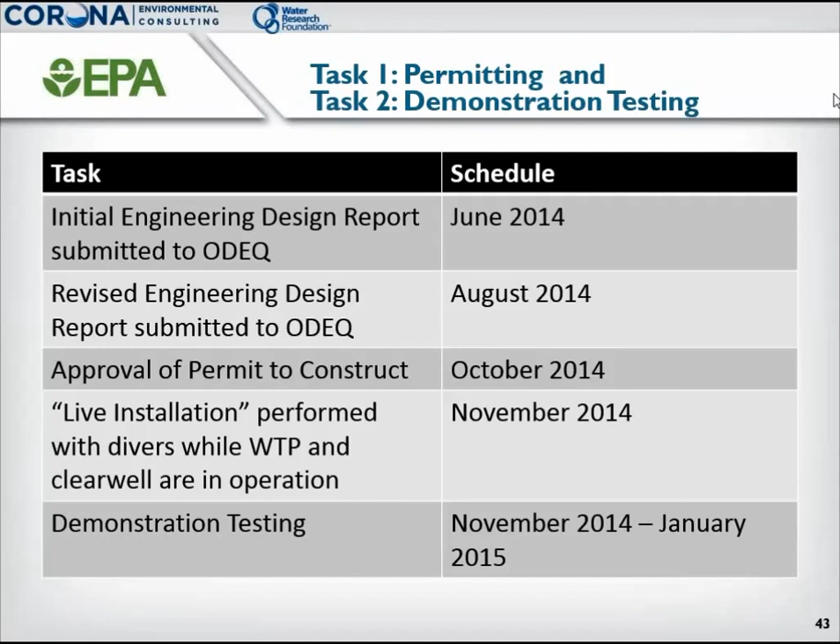Primary equipment used in the demonstration testing included an Aqua Metrology Systems THM100 and a Parker THM analyzer, a PAX PWM 100 mixer, a Soler and Palau vent fan, a 3 horsepower submersible pump combined with 2 BETE TF spray nozzles, and a 2 horsepower Aqua Aerobic Systems AquaJet surface aerator.

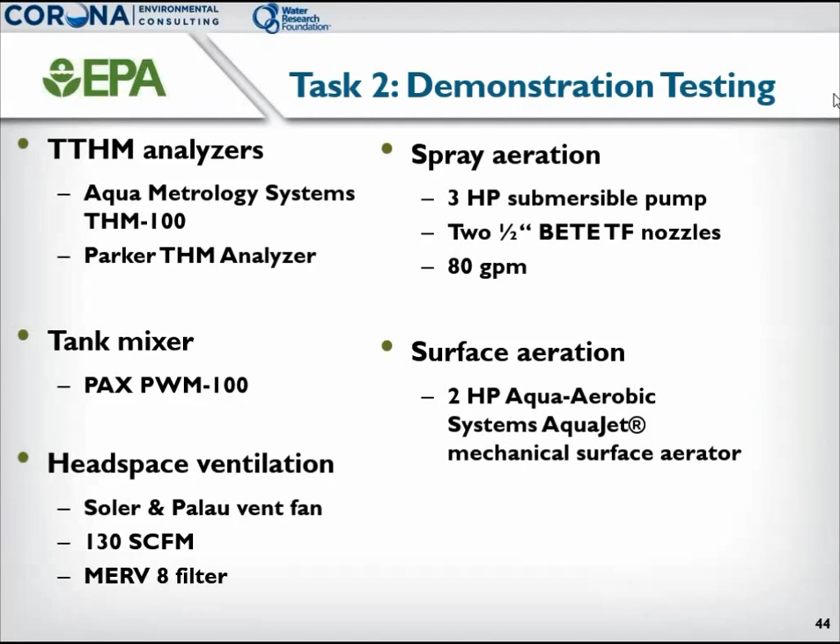We acknowledge the contribution from all the equipment providers, including Aqua Aerobic Systems, PAX Water Technologies, Aqua Metrology Systems, and Parker Hannifin Corporation. Without generous contributions by these equipment providers, demonstration testing and THM data collection would not have been possible.

The aeration equipment was installed and uninstalled live while the water treatment plant and the clear well were still online, in accordance with AWWA standards, by Midco Diving and Marine Services. Installation of equipment outside the clear well was performed by Haynes Equipment.

Prior to the installation of the aeration equipment, the clear well floor was cleaned of all flocculated material, silt, sediment, sand, and any other accumulated debris.

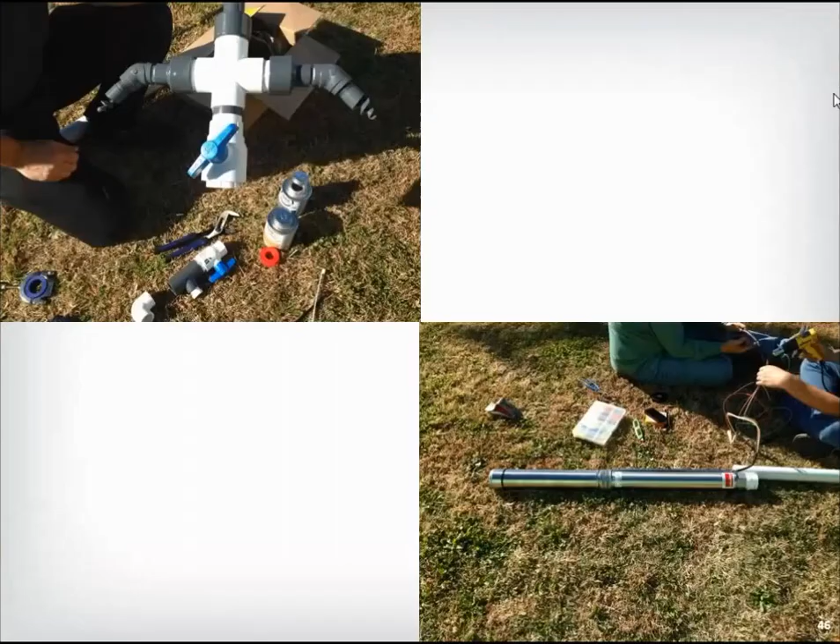The spray aeration system included a Dayton 3 horsepower submersible pump and 2 0.5-inch full cone BETE spiral spray nozzles. The design parameters that influence THM removal efficiency include the water droplet size and air-water contact time.

For the design flow rate of 80 GPM, it was estimated that about 50% THM reduction would be achieved at the clear well.

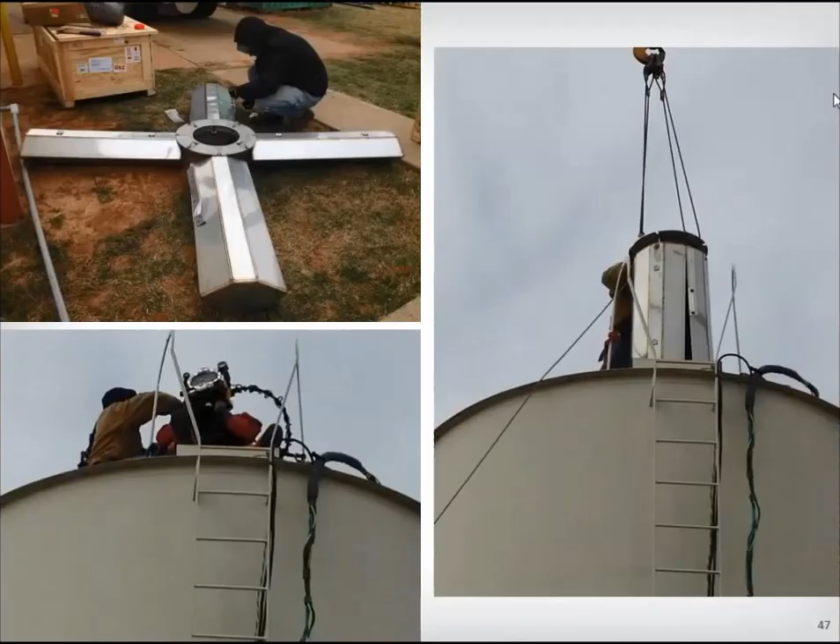With the surface aeration alternative, a floating surface aerator was installed in the clear well. A 2-horsepower aerator draws water and discharges it at a rate of approximately 690 GPM, with an impingement or white water diameter of about 7 feet.

Modeling results suggested that a power input of 2 horsepower would achieve approximately 60% THM reduction. The surface aerator selected for this application was designed with a collapsible float, shown here in the pictures, which allows the aerator to be installed and maintained through the existing 24-inch square hatch.

In this picture are the THM analyzers. On the left is the Aqua Metrology Systems THM-100 online THM analyzer. THM levels were monitored every 4 hours through this self-calibrating instrument. On the right is the Parker THM analyzer, which was used for grab sampling and can measure THM concentrations in less than 30 minutes without tedious sample preparation.

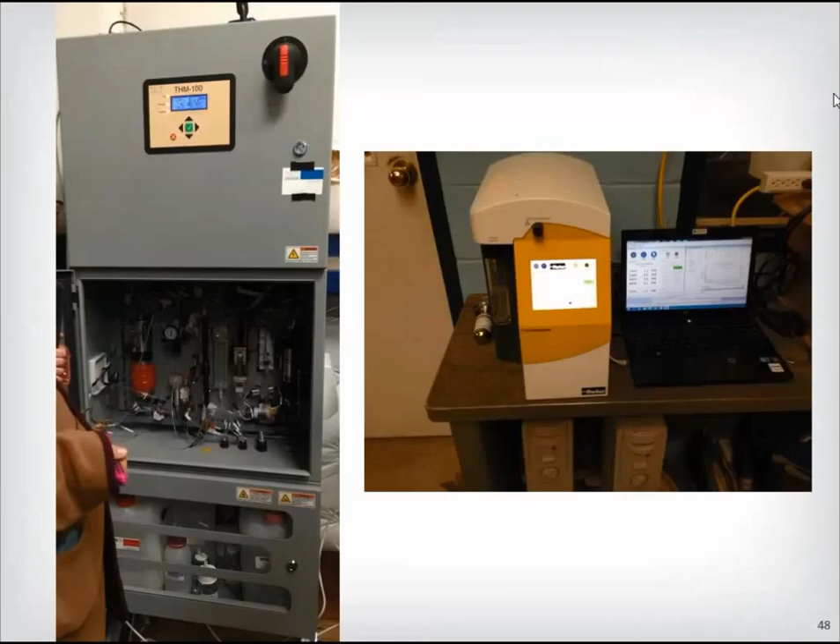The testing period included the following test phases. The first was just baseline conditions, which was normal operations for the water treatment plant. Then we added active ventilation only, followed by tank mixing and active ventilation. Following that was surface aeration with both active and passive ventilation, and then spray aeration, an engineered spray system with both active and passive ventilation. Each test phase was conducted for a 1-week period.

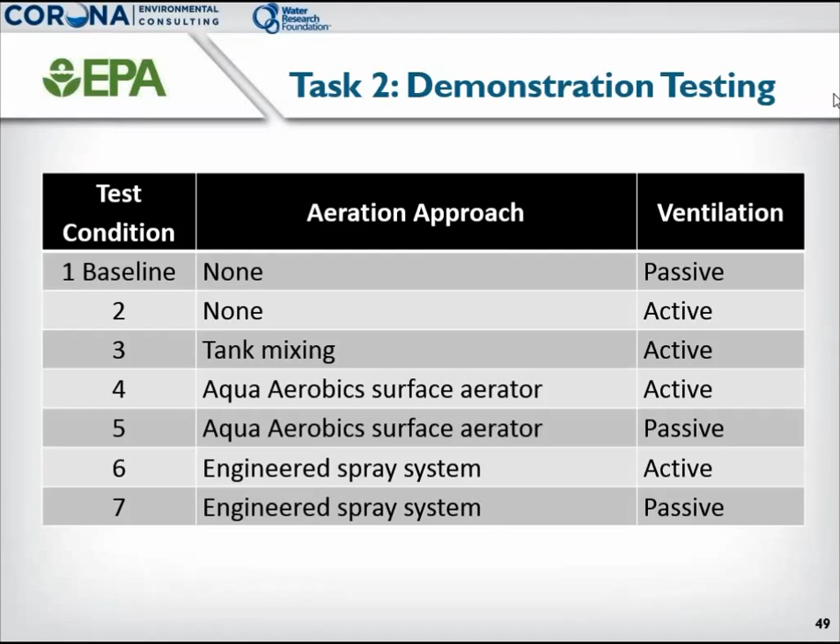The baseline condition was repeated at the beginning and at the end of the test period. Some test conditions were repeated in order to collect confirmatory data.

Now let's begin looking at the data from the project, first with respect to water treatment plant operations, which will play a large role in the outcome of aeration at this utility.

This figure shows the water treatment plant production, shown in blue, on December 1st and 2nd, 2014. Also shown are the start and stop times of the high service pumps, shown in red. Both the water treatment plant and the high service pumps operated between 7 a.m. and 5 p.m. on December 1st and were shut down overnight. This operational trend was consistent throughout the 2 months of the demonstration testing period. Generally, the water treatment plant was operated continuously and high service pumps intermittently during daytime hours only.

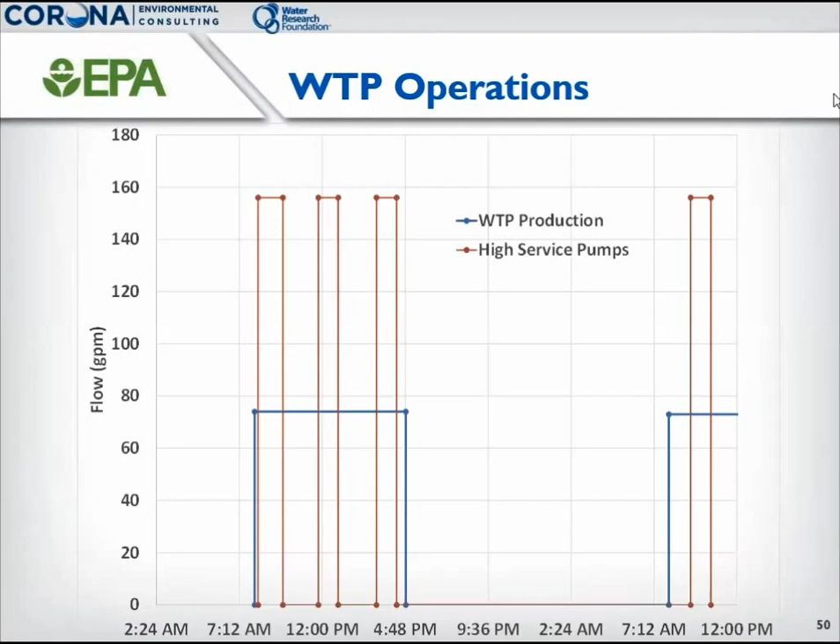From the perspective of the clear well, during daytime hours, the water level and water volume in the clear well are continuously changing. The clear well level increases until the high service pumps turn on, which pump at a higher rate and lower the tank. This happens several times each day. However, the water volume in the clear well stays constant during evening and night hours until the next morning.

This variation in clear well level and volume affects aeration because THM reduction is directly proportional to the hydraulic residence time in the clear well. During daytime hours, when either or both the water treatment plant and high service pumps are in operation, the average hydraulic residence time of water in the reservoir can be as low as 2 hours. At such low hydraulic residence times, there's not sufficient formation of THMs within the clear well to be removed. As such, the performance of any aeration system in THM removal is likely to be less than optimal under these conditions.

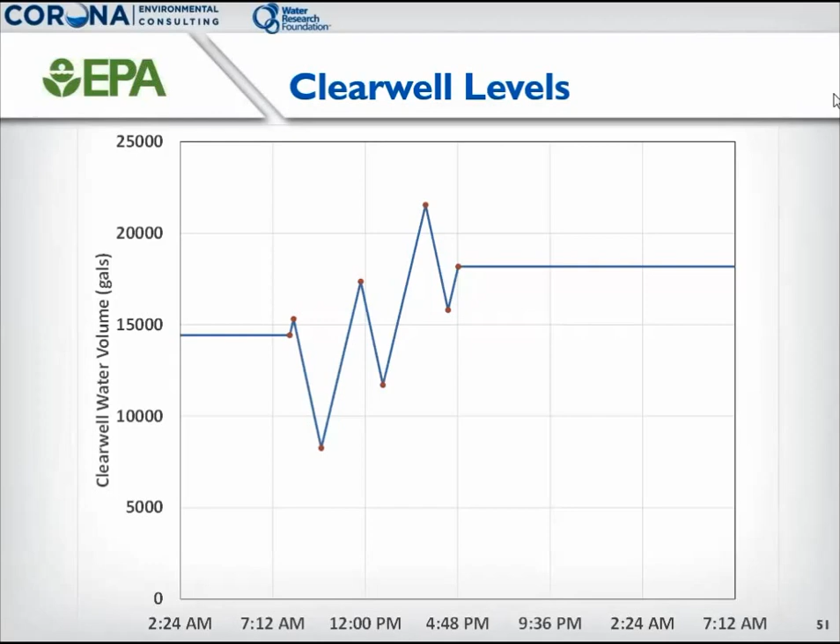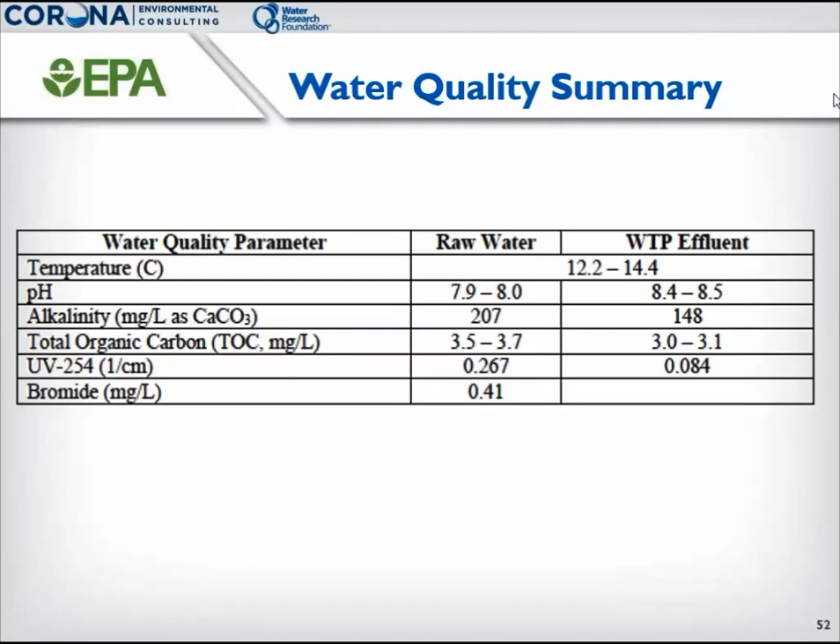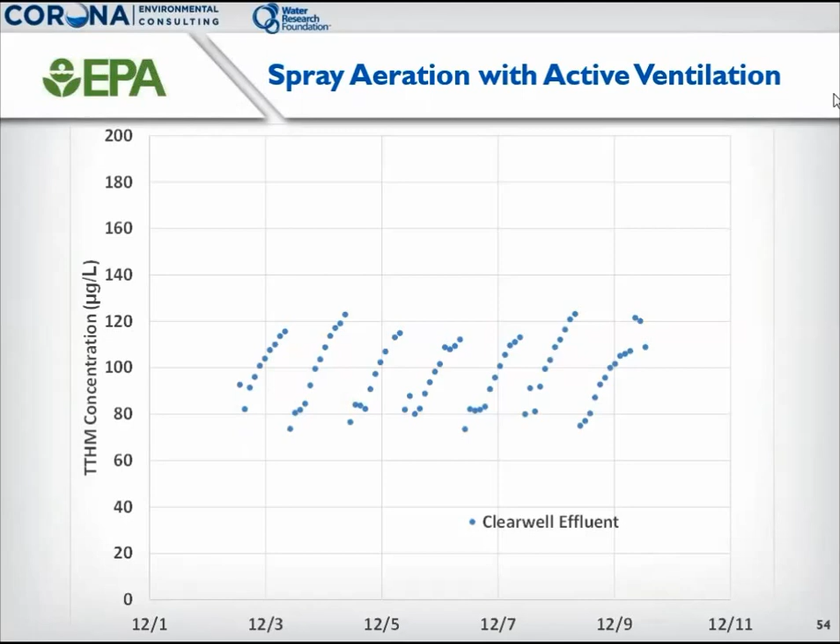Given these factors, there's a difference between THM removal by the spray aeration system and overall THM reduction through the clear well. A different approach needed to be adopted to understand the actual THM removal by the spray aeration system.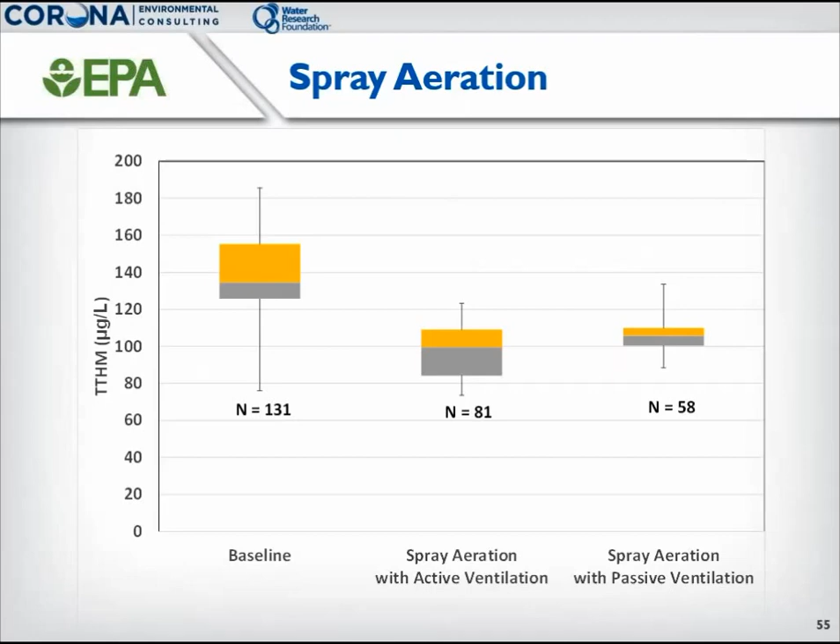In order to decouple the different THM formation and removal mechanisms, a different analytical approach was adopted. Several assumptions needed to be made to perform this analysis. These assumptions included that THM data recorded during daytime hours were excluded because of the continuously changing hydraulic residence time.

Night samples taken from the pipe between the clear well and high service pumps represent the THM formation without aeration, because the plant is not pumping water and the pipeline samples are not aerated. Data shown in blue on the figure is the last night sample before the morning pumps turn on.

When the high service pumps are switched on in the morning, the first sample collected and analyzed by the online analyzer represents the water quality that was present within the clear well and was impacted by the aeration system. This data is shown in orange on the figure. The percent removal, which is essentially the difference between the blue and the orange data, is shown in gray on the figure.

Based on this analysis, it can be inferred that the spray aeration system with active ventilation removed approximately 34% of the THMs from the clear well.

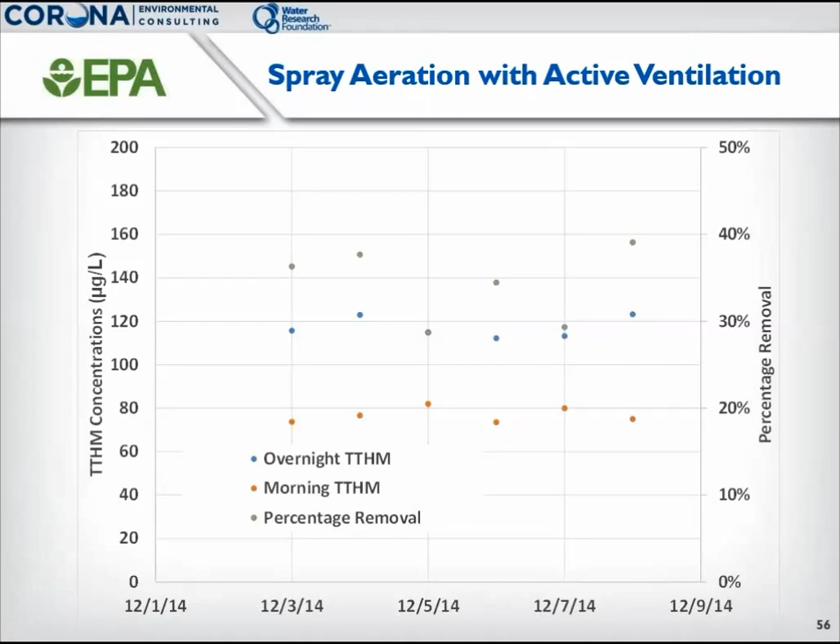Now jumping ahead to surface aeration. The raw data figure for the surface aeration was similarly sawtoothed as the figure shown for spray aeration. Fast forwarding to the overall reduction of THM concentrations through the clear well during surface aeration, this can be summarized similarly in a box and whisker plot.

The median THM concentration with surface aeration with active ventilation was 108 micrograms per liter, and with passive ventilation was 107 micrograms per liter. This compares back to the median of 135 micrograms per liter during baseline testing. As such, surface aeration with active and passive ventilation results in about 20% overall THM reduction compared to baseline conditions.

Compared to spray aeration, the overall THM reduction through the clear well during surface aeration was slightly lower. Slightly colder water temperatures during surface aeration compared to during spray aeration could have contributed to the reduced effectiveness of the surface aerator.

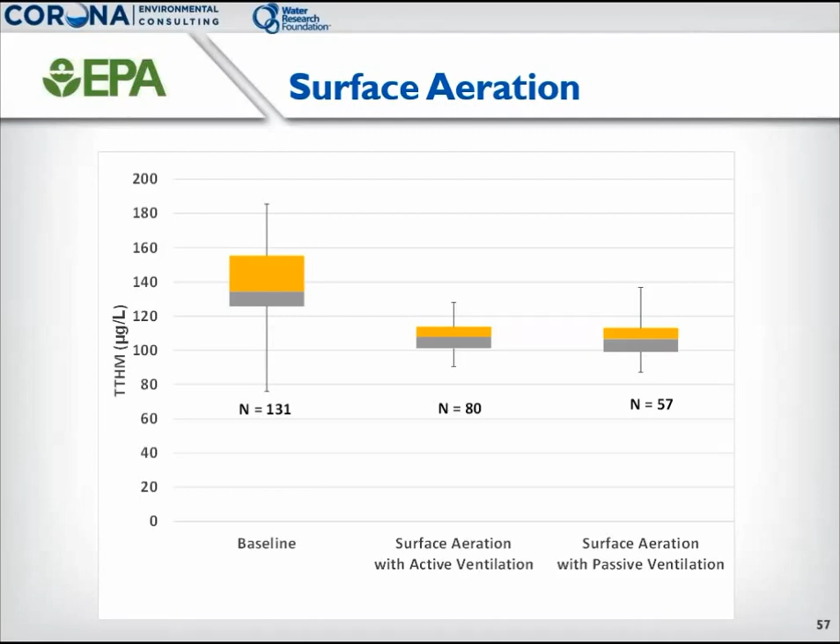A similar approach to the one described for spray aeration was adopted to estimate THM removal achieved by the surface aeration system, with maximum overnight THMs shown in blue and first flush morning THMs shown in orange. Based on this analysis, it can be inferred that surface aeration with active ventilation removed 22% of clear well THMs.

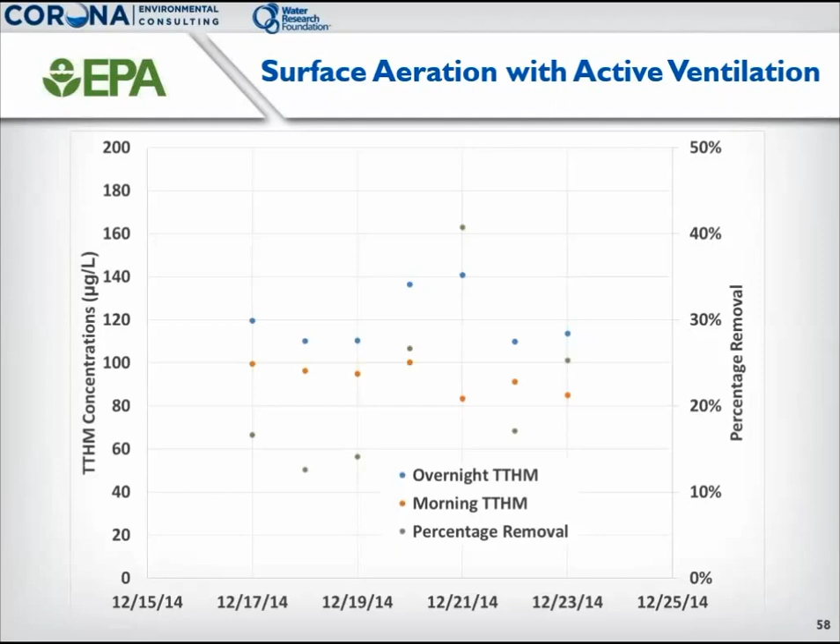In addition to overall THM reduction, insights were also gained on individual THM speciation. With differences in volatility and diffusivity of the 4 THMs, what happens to the speciation from chlorination through aeration? The first bar shows the water treatment plant effluent, with larger amounts of chloroform forming early.

The second bar shows the baseline conditions before aeration was started. Given some time in the clear well, all of the constituents increase: chloroform shown in gray, dichlorobromomethane and dibromochloromethane represented by X2 in the figure, and bromoform shown in blue.

Finally, after spray aeration, all of the THMs decrease, with chloroform decreasing the most, followed by bromoform. The main reason for including this data is because it is often assumed that because the volatility of bromoform is so much lower than chloroform, aeration may not be effective for situations with significant bromoform concentration. This data shows there are other factors involved, and bromoform can be successfully removed via aeration.

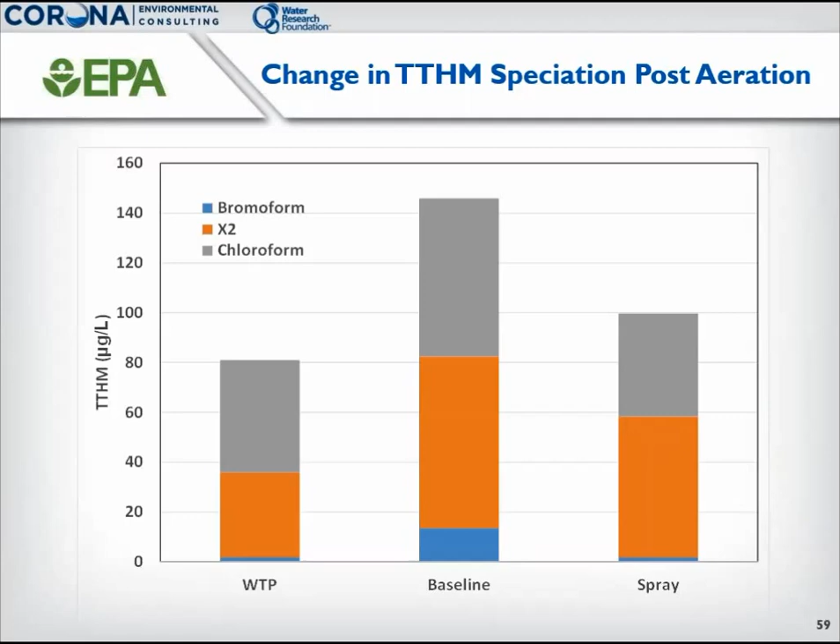Summarizing aspects of the project, both from data in previous slides and from data I was not able to present due to time limitations, both surface and spray aeration lowered clear well THM concentrations between 19 and 34%. The lower removal compared to planning was likely due to lower water temperature during the study compared to that assumed during planning. THM removal by aeration is not equal to overall THM reduction achieved within the clear well because of various factors including sampling locations, hydraulic residence time, and intermittent operation of the water treatment plant.

Both mixer and active ventilation by themselves resulted in marginal reduction of THMs in the clear well. Aeration by itself will not result in achieving sufficient THM reduction for stage 2 DBPR compliance in the Otoe-Missouria Tribe water system. Both field measurement instruments for THM analysis yielded results within plus or minus 10% of laboratory results.

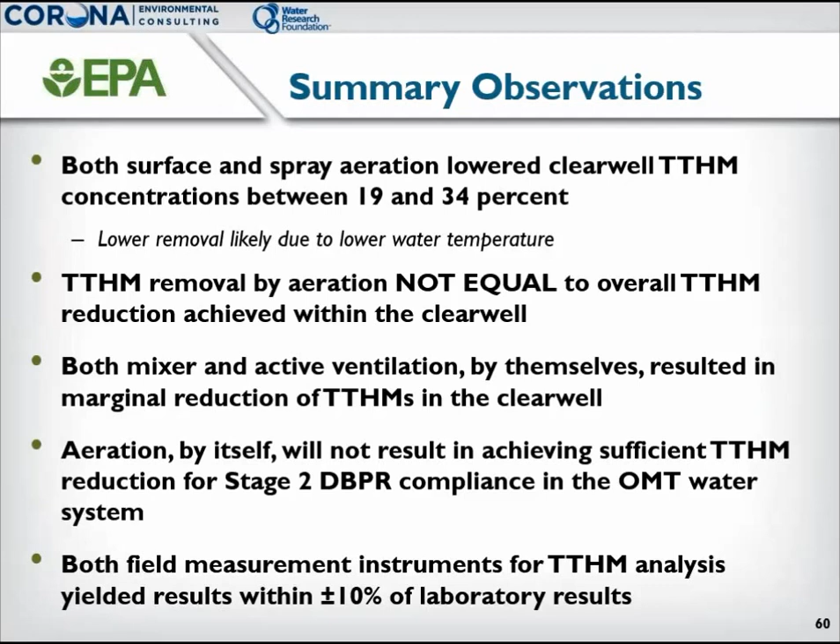Finally, a little guidance on aeration implementation. Prior to evaluation of any treatment technology or management option, the extent of the DBP problem needs to be understood. One takeaway message of this project is that aeration technologies remove THMs from water, but they do not alter THM formation potential of the water. So if there's additional organics and chlorine left in the post-aerated water, THMs will continue to form.

Aeration technologies can only be installed in water treatment plant clear wells or distribution system reservoirs. So the relationship between the location of the clear well reservoir and the stage 2 DBP sampling sites in terms of water age and THM reformation needs to be established. This sets some practical limitations on both the highest THM concentrations where mitigation by aeration is feasible and locations where aeration technology can be implemented.

The concept is illustrated here with a hypothetical water utility. Assume the x-axis represents all the sampling locations in the utility's distribution system, starting with the water treatment plant at the extreme left and the stage 2 DBPR maximum hydraulic residence time sites at the extreme right. The sampling sites A, B, and C are arranged by increasing THM concentrations. The y-axis shows the concentrations, and the green curve represents the THM concentrations at the various sampling locations.

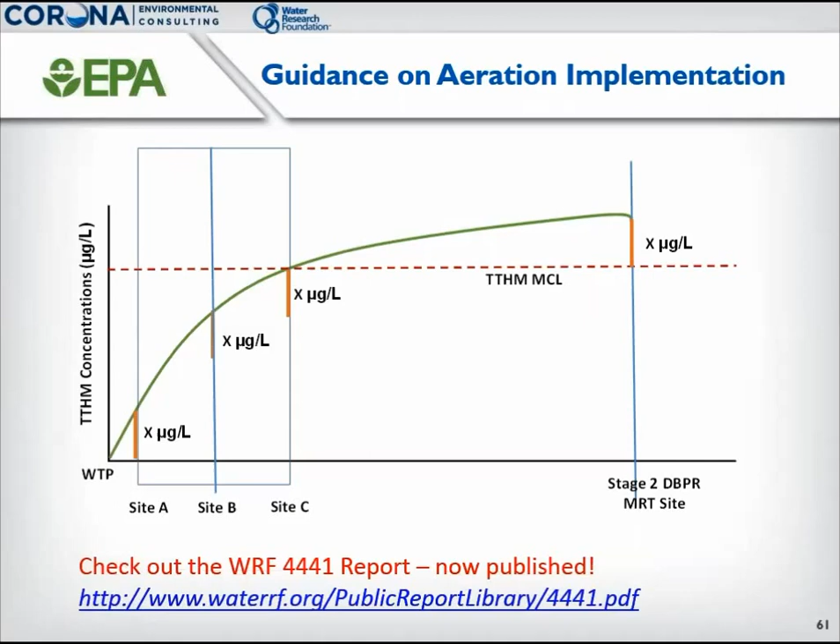While this project was designed specifically to study the removal of THMs at the water treatment plant clear well as a means of hypothetically helping multiple downstream consecutive systems, it was a learning experience in that we became sensitized to the high percent removals and residence times that would be required to achieve those removals so early in the THM formation process, the equivalent of trying to use aeration at site A on this figure.